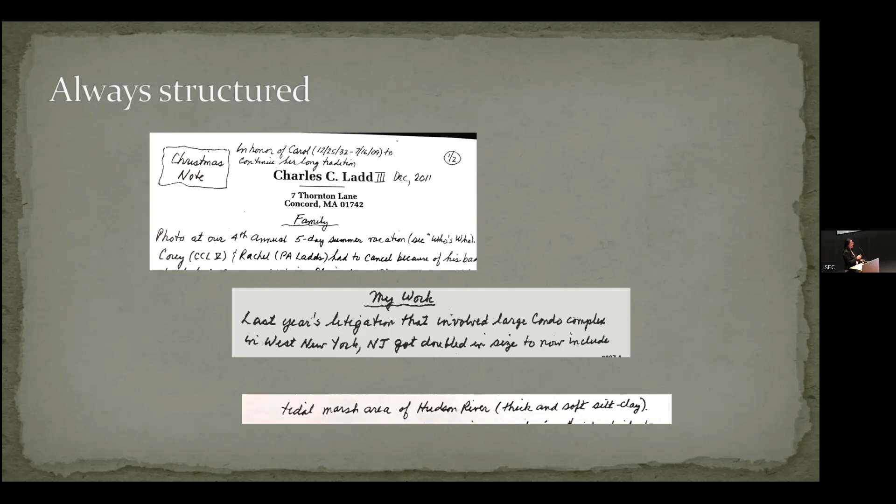Okay, this was a bit of what Chuck was about. But the reason I actually pulled out this Christmas letter from 2011 is because it was accompanied, as was normal, by a family picture on some nice vacation he and his wonderful, very big family had gone to. And the pictures typically came with a legend, with really carefully chosen symbols.

And then, of course, at the top, always CCL and the date. You would never want to forget that when you give him something, right? Initials and date.

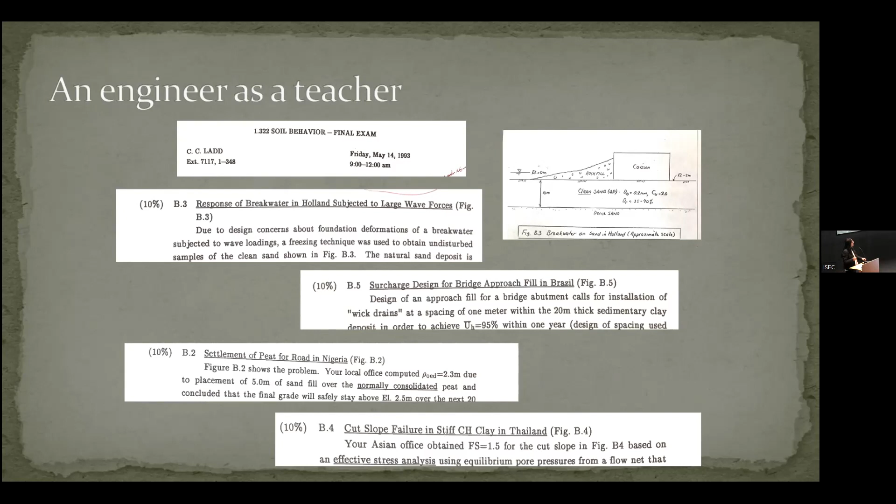But you see, these were just, I grabbed a few questions, you know, response of a breakwater in Holland, surcharge design for bridge abutment fills in Brazil, settlement of peat for road in Nigeria, cut slope failure in stiff CH clay in Thailand. This is how he fed his profession into the classroom.

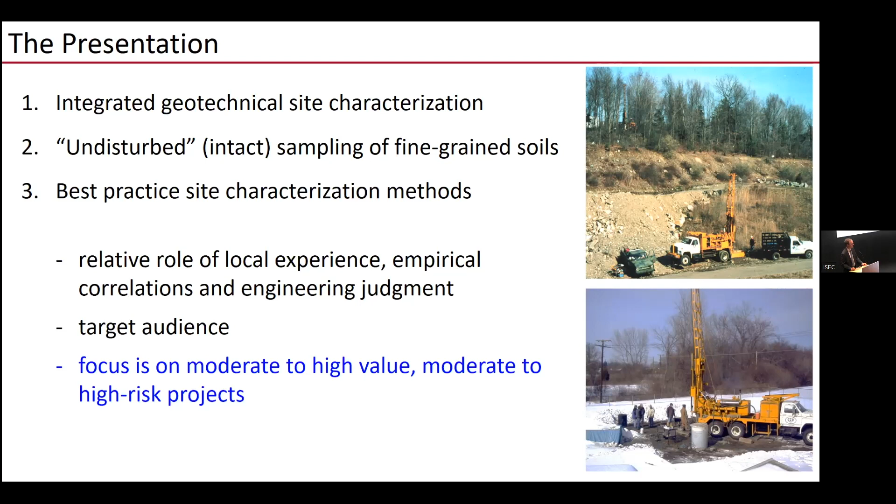So what is integrated site characterization? It goes beyond site investigation. It really is a methodology where you try to use a framework to guide you through all of the steps to make the actual site investigation part most efficient.

My friend and colleague, Jason DeJong, has a paper published in 2016 that has a framework and a roadmap describing in detail what integrated site characterization is. A key component to that roadmap is to develop a priori a geologic model of your anticipated site conditions.

And certainly on larger value or higher risk projects, you're going to need to bring in a team of geo experts. I will show you a case study where that needed to be done. And ideally, it's an iterative process.

Now, again, clearly on smaller projects, we're going to build a new Tim Horton Donuts on Route 1 in Saugus. We're going there one day. We only have that amount of time for drilling and sampling. We're not going to apply a lot of the things I'm going to talk about here. We know it's going to work in that case.

Now, in the offshore world, where I do a lot of my work, there are two products that come out of an integrated site characterization. One is the ground model. The ground model is a database of all information collected from the project, both qualitative, usually geologic-based information, and quantitative, things that we like to measure, in situ testing, laboratory testing, and so forth.

And ideally, at least in more recent times, this is all being integrated into a GIS type of framework where you can start to use visualization tools and allow everyone involved in the project to get access to that data. Once the ground model has been established, we then move on to create the design basis.

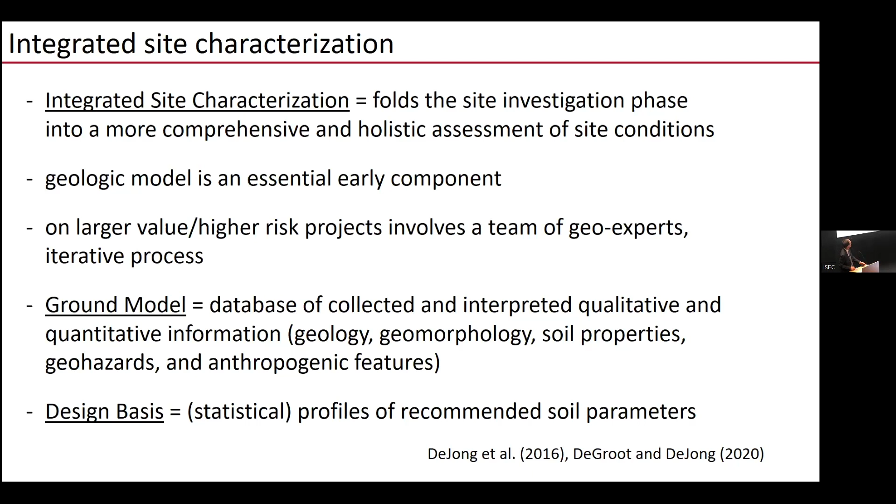And again, it all starts with geology. I have two quotes here from two of the early textbooks of geotechnical engineering. Professor Taylor at MIT, in his book, talks about the importance of geologic features. And then the rival from Harvard, Terzaghi, produced his book in the same year, not coincidentally. There's a couple of key statements in there that are very telling.

Number one is the first step. The first thing you should do is don't call a driller, don't book the driller, but study, do your due diligence in terms of the desk study.

Again, in the greater Boston area, we know it quite well, but I'm talking about sites you either don't have experience with or new regions you're working on. What's important is that this is written in the future tense: work with the geology, understand it as best you can before you lay out your site exploration. The idea is that when you go to the site, it evolves into a process of confirmation rather than new discovery, confirming what you suspect should be there in developing your site characterization.

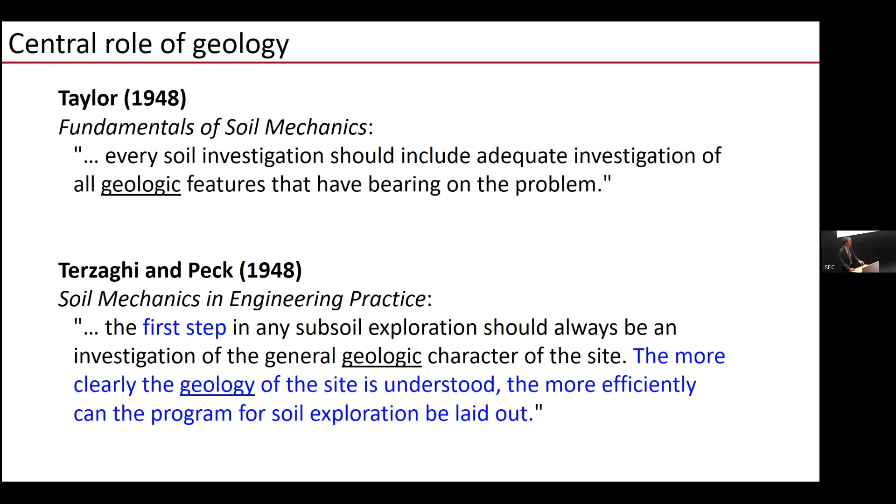Geology is really interesting in the New England area since we've been glaciated. This slide from Janet Stone of USGS in Connecticut shows the extent of the glacial maximum period about 25,000 years ago. The glaciers ended here, creating Long Island, Block Island, Martha's Vineyard, and Nantucket — that was basically the terminal moraine. The fact that our region has been glaciated created a significant influence on the type of soils deposited here.

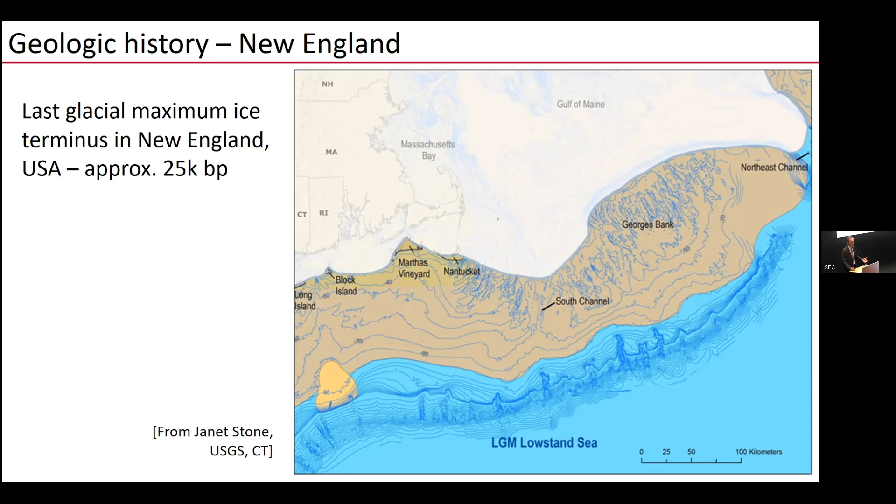Soils vary significantly across the state, and likewise in other glaciated regions of the world. On this map, here in our area we have marine clay, the Boston blue clay. We have marine clays deposited going up the coast with increasing sensitivity as we go north. Inland, near UMass Amherst, we have Glacial Lake Hitchcock, a long lacustrine lake environment where our varve clays were deposited — completely different material than Boston blue clay. And up at Lake Champlain, a marine environment, we have deposition of the very sensitive Leda clays. These can all be explained through the great work geologists have done mapping the state, creating maps we can use so that when we do a site investigation, we can go to this geologic information first to better understand our exploration.

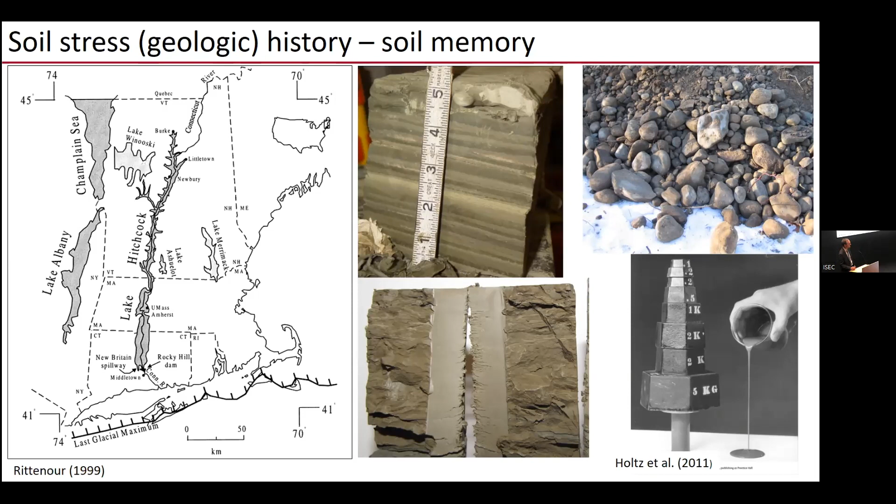But there can be subtle changes in soil characteristics over very small spatial distances. This is a picture of UMass Amherst. When the glaciers were retreating north toward Quebec, the water was about 77 meters deep on top of present-day Amherst. Sediments were coming in and created the varve clays — coarser material settled out in summer, and when the lake froze in winter we got finer grained clay, forming a varve. We have 1,400 varves on our campus, over a 100-foot deposit, so 1,400 years of deposition.

We have on our campus what is supposedly the tallest library in the world. I don't know why you'd want that, but we have it — 26 floors, reinforced concrete, pretty significant dead loads. You fill it up with books, which is what they did when it opened, and that's a lot of load. Yet this building is on a very simple mat foundation, because the campus is basically a drumlin with some sand and gravel on top of glacial till, on top of bedrock. Pretty easy foundation design.

You go 400 yards to the west, and right here is the edge of Glacial Lake Hitchcock, where the varve clays were deposited. The lake bed dipped very steeply into the bowl that was essentially the Connecticut River Valley. Right here is our sports arena, our hockey rink, an equivalent two-story building, open structure. The loads are nothing other than when you have 10,000 people in there, but that's still nothing compared to a 26-story library. Yet this is on a deep foundation, a Haley and Aldrich project — on PIFs, or Franki piles as we used to call them, because it's in the soft varve clay.

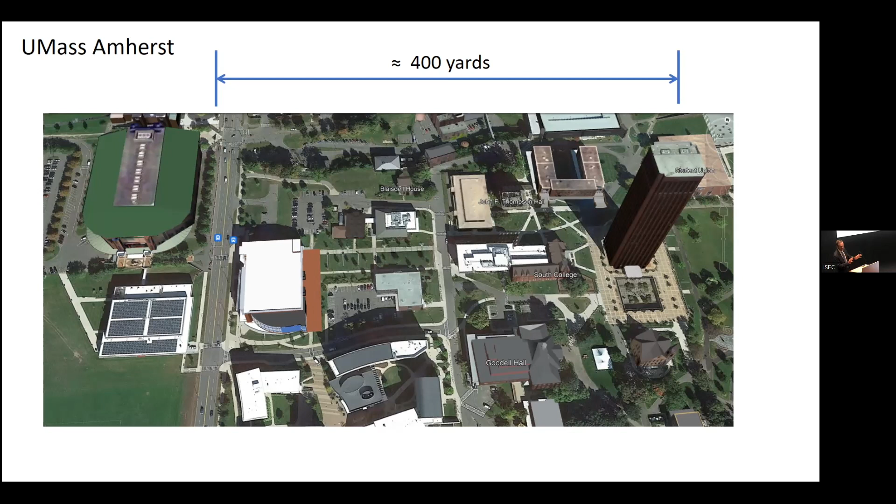So that brings me to what Professor Ladd always said: stress history, or geologic history, as I like to call it. Professor Ladd had great intuition in selecting one of the more famous acronyms in geotechnical engineering, SHANSEP. How many of us have actually written out what SHANSEP stands for? Probably never. Stress history and normalized soil engineering parameters. It incorporates the two most important aspects of fine-grained soil behavior: the influence of stress history on that behavior, and the fact that you can normalize data.

And I'm not talking about whether SHANSEP is applicable or not, but just the concept of normalizing data is so valuable to understanding whether things like your undrained shear strength make any sense for the stress history that your soil has.

If we look at stress history, there are a number of pre-consolidation mechanisms that can cause a soil to be altered from its original depositional environment, and I'll list those in the next slide. But I will say you will rarely encounter a truly normally consolidated soil. I've had cases where people have said, oh my God, we have an under-consolidated soil, which makes no sense at all, because they collected lousy samples and got pre-consolidation stress below the in situ vertical effective stress. It was just poor quality work.

Now, we are geotechnical engineers. At least I personally often struggle working with geologists because they're very qualitative. They use a lot of words that I don't often understand. We like to quantify things. So for us, we take that geologic history and we quantify it. For sands, we use relative density. For clays, we use pre-consolidation stress or the vertical yield stress.

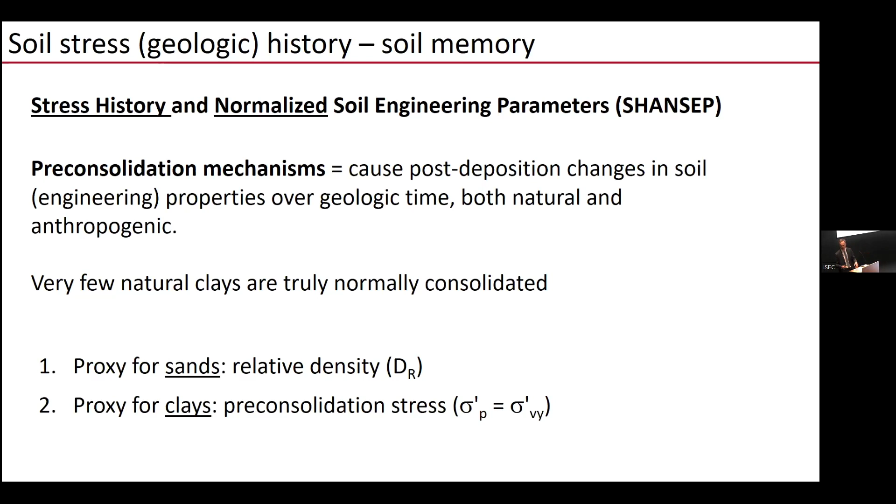Desiccation - we struggle a lot in New England with desiccation. In other parts of the world, we have a fairly high water table, but it does fluctuate up and down. And we did have ground freezing before vegetation came back after the glaciers. And then we have drained creep, aging, and physiochemical phenomena.

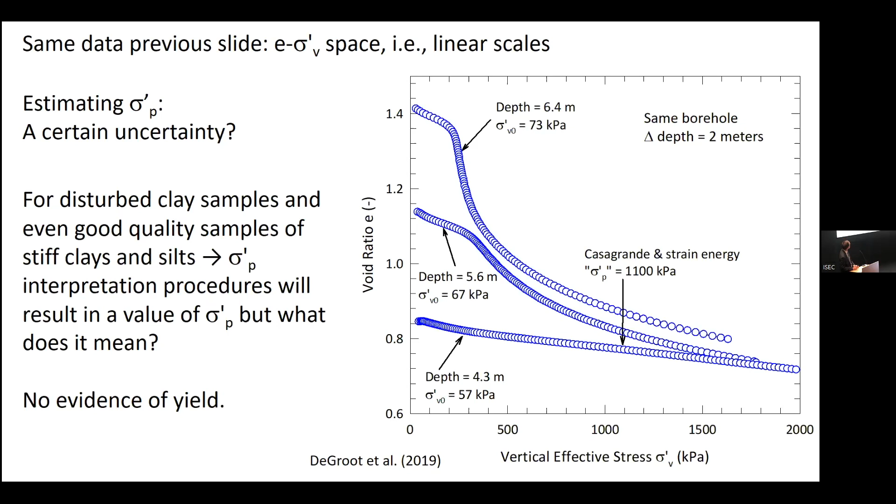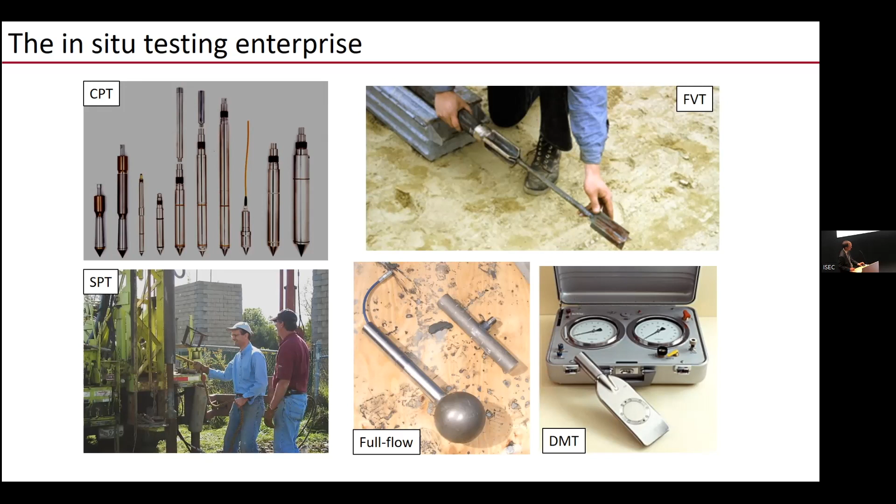On the other hand, once we have a sample in the lab, we have controlled boundary conditions. We can control stresses, drainage, strain rate, and measure what we want. A triaxial test gives us Mohr's circle, we can measure the undrained shear strength, and a CRS test gives us the vertical yield stress. But none of that data is particularly useful unless we have good quality samples.

So we have this challenge of balancing the best of both worlds. When I get to the third part of the talk, I'll give at least some of our recommendations on what we consider to be best practice methods.

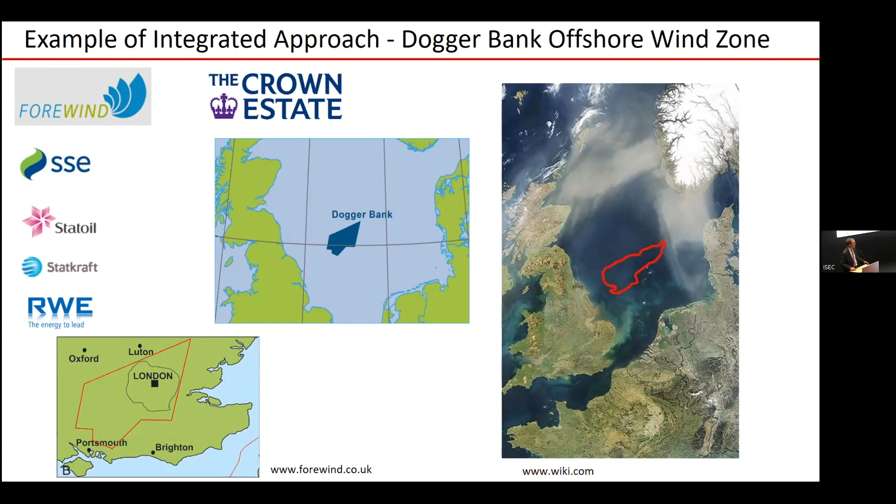A consortium of energy companies was put together. Statoil, now called Equinor, and the Crown Estate were leading all of this effort, and it was called Forewind. Early on in the project — a big project at a big spatial scale — they decided to do an integrated study. The first thing you look to is the geology.

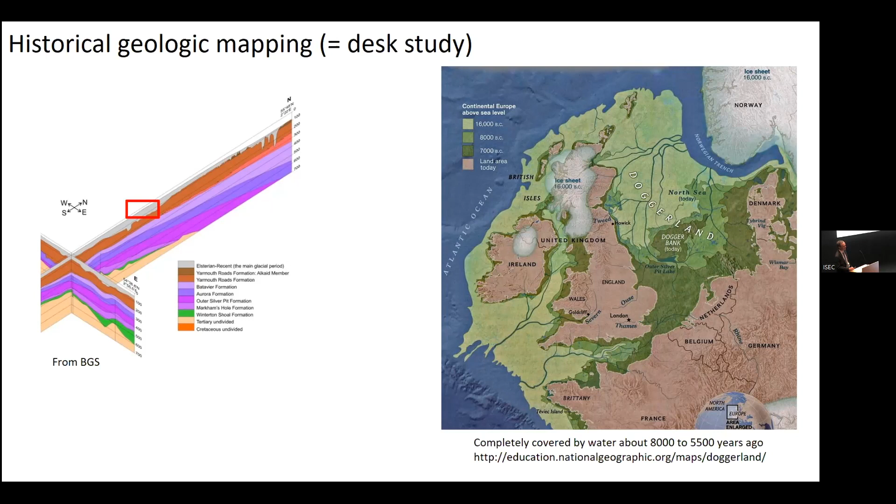And sure enough, some of the early data started to come in and said, wow, there's a lot of heterogeneity in this project. And so the geo team leader, Tor Inge Yetginer-Tjelta of Equinor Statoil, in my estimation one of the best offshore geotechnical engineers in the world, period, he was the team leader, and he quickly recognized that he needed to put a comprehensive team together to really do a proper job of characterizing his site.

I mean, there are billions of dollars on the line here. So he literally brought in from different companies experts in site investigation, lab testing, in situ testing, geophysical, geostatisticians, and so forth, and essentially had quarterly meetings where he locked the team in a room and said, you're not coming out until you make sense of this latest round of data that has come in.

Now, obviously, there was a great opportunity to do iterative work. So the site investigation program happened over multiple years. And the slide I'm showing here is what led up to what's called the consent phase. The consent phase is simply you need to prepare a package to convince the federal government or the UK government that you have the capability to continue working and eventually develop this wind farm. So the SI work did not stop here.

But look at the data that was collected, 60,000 line kilometers of geophysical data. I mean, this was terabytes of data. And thank God we had geophysicists on the project, because every time I look at one of those things, I have no idea what I'm looking at. I mean, I see lines going this way and that way, and they're very valuable, but they don't give us numbers. We want numbers. But look at the geotech part.

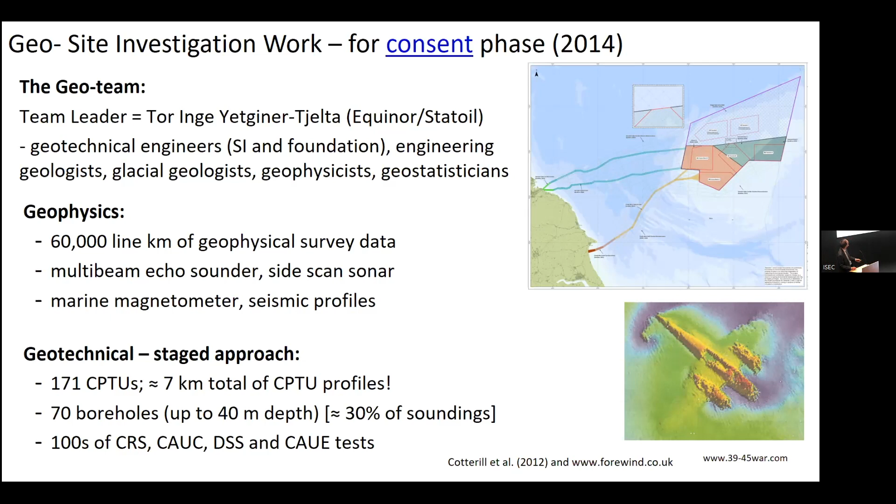And what was a really interesting experience is that while we were working on the project, again, there's our geologic map, we found the glacial geologists started using our CPT data to start figuring out the geologic history. And I remember Tom Lunne and I looking at each other and saying, wait a second, it's supposed to be the other way around. They're supposed to give us the geologic history to help us make sense of our data. But again, because it was an integrated team, it came together very nicely.

And geoscientists are great at making cartoons, and this was the updated cartoon map that now replaces this one here. I mean, you had everything here: the glaciers colliding. Some of the glaciers had a so-called wet interface that smoothly rode over the till. Some had a dry interface that caused glacial thrusting and faulting in the soil.

This you can see in the geophysical mapping. We had channels, sometimes filled with soft clay, sometimes filled with North Sea sand, which was the easiest part to characterize, just ordinary quartz sand from the North Sea.

But the most significant thing was that we eventually were able to get the geologists to confirm that this place was aerially exposed for many tens of thousands of years. And that causes desiccation, deep freezing, and lowering of the water table. And as those of you who have worked with desiccated soils know, they are very, very difficult to characterize. The data is usually all over the place.

And when the early lab data started coming in, I started looking at the CRS data. It made no sense whatsoever. The word desiccation had not yet come up, and I look at it and I'm thinking, wow, this looks like a desiccated soil. And that became a central focus of going forward, trying to help us make sense of the data to eventually come up with a design basis.

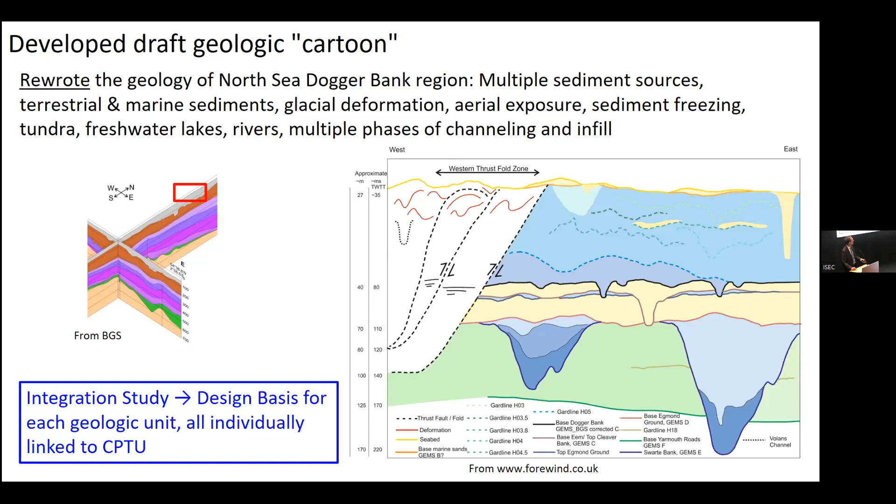Closer to home, as some of you know, we have an exponentially growing offshore wind industry in the Northeast. Good luck finding a drilling vessel over the next few years, and good luck finding a lab that does good quality testing and has the capacity to take on this work. The rest of the world is not stopping, and yet we're coming on board, and this is a lot of work. These things are spatially enormous, the landmass involved.

Now, one of the interesting things we have here is the previous slide I showed, the glacial maximum. These hatched areas are some of the lease areas that have already been awarded. And frankly, I would not have bid on a lease area that sits right here, because that's where the terminal moraine is, and it's loaded with cobbles and boulders.

So you can imagine the challenges presented with installing the foundations, but also the cable routes going to shore. There's a very high probability that any of these leases beyond this glacial maximum do not have these cobbles and boulders, which some of them can be the size of a house, I've been told. And so far, the data coming in from some of these sites is proving that to be the case.

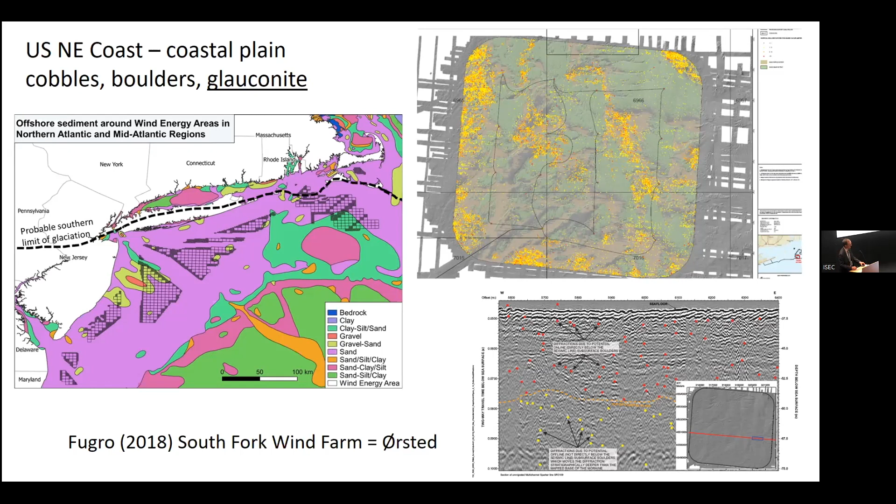And then finally, this is the latest round of leases let by BOEM. This was about a month ago, $4.4 billion for six leases. This is just to have the opportunity to consider developing the site. Just here's your money, take it, and you don't get it back. Now, unfortunately, this money goes into the black hole of Washington. None of it is earmarked to feed back into the industry, but the amount of money here is just incredible.

And they will be spending untold amounts of money doing site characterization work for these. There are many more in the pipeline. Coastal California is getting in the picture, and so is South Carolina, Florida, and Texas. There is a ton of work coming forward in this industry, and I think it's very exciting, especially for the younger generation here in the audience.

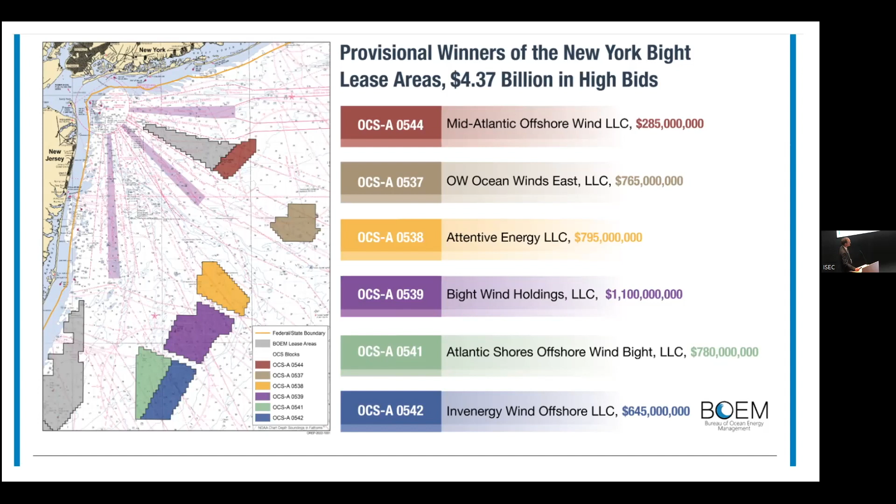Okay, so that's the end of part one. Now I want to do a deep dive into Professor Ladd's first love, which is sampling and sample disturbance.

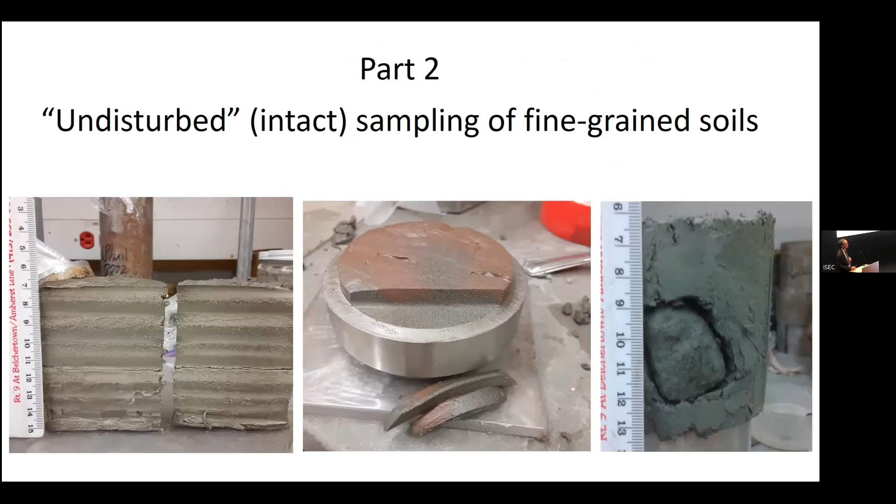And we're going to start by looking at a stress path. I know this may cause a little bit of PTSD for some of you, but we have to use stress paths because they are so valuable. The question asked is, we have a low OCR clay. We know K-naught is less than 1, so it's sitting here in PQ space at 0.1.

If we load it in a vertical direction, we know we develop positive shear-induced pore pressures, and we get some undrained shear strength. We collect a sample, bring it back to the lab, and find out that the effective stress in the sample is over here. How do we know that? We can actually measure the suction, because the pore pressure goes negative when we have a suction.

In the old days, you would do this in a Triaxial cell with a null indicator. And if you know what a null indicator is, you should be retired by now. But we have more modern—sorry, Jack, you don't need to retire. You look so young anyway, so you're good. You're good for another 20 years.

But we also have suction probes that can actually measure the negative pore water pressure in the soil. This was one of Professor Ladd's first pieces of research work. It was his first major paper in the 1960s with Lambe, on the effective stress after sampling. If you do a really good state-of-the-art job of collecting a soil sample, you will still lose about 70% of the vertical effective stress in the sample. And if you do a lousy job, you'll be down to almost 100% loss.

So we have this sample sitting here. It's at an isotropic state of stress, which has nothing to do with in situ. It now has a huge OCR, which has nothing to do with in situ. We don't actually know what the effective stress is, but let's do a UU test anyway, because it's inexpensive, quick, and we'll get a number.

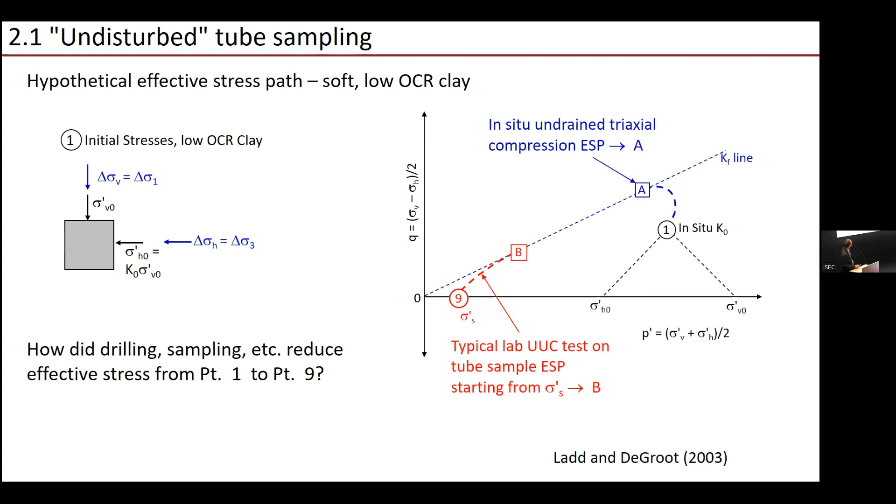But let's ask the question, how did we get here? The first step is we have to drill a borehole, and we cannot avoid that. There's going to be stress relief. The interesting thing is that when we drill a borehole, it's like a Triaxial extension test. So even if we have a drilling mud, we're going to get a reduction in the vertical stress. We start to migrate over toward Triaxial extension.

We cross the P axis, which Professor Ladd called the perfect sampling point, just as a frame of reference for his work. And then if you keep going, and if you do a lousy job and don't use a drilling mud, you could actually fail the soil you want to sample in extension unloading before you actually collect the sample. So the first job is to stay as far away from this failure envelope as possible. We cannot avoid this process up to point 2, but we don't want to go to point D here, where we've actually created failure before we even run the test.

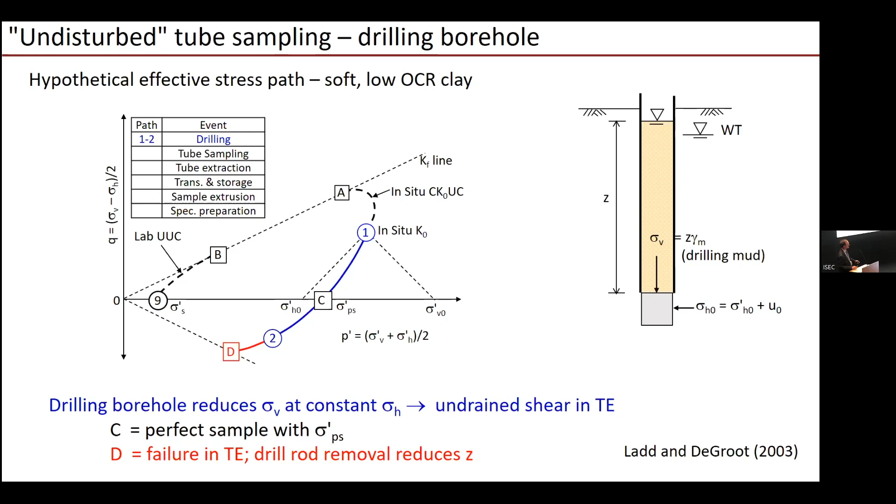The next step, which Professor Baligh worked on, and CT Chin, who's listening in, did his work on, is: what happens when you push a tube into the soil? In Professor Baligh's work, which is the strain path method, he found that as the tube is coming along, the soil goes through a compression cycle, reverses to an extension cycle, and then more or less returns back to where it started. So it's one cyclic loop back and forth.

In his research, he found that the geometries of samplers, thicker samplers and so forth, induced larger strains. Looking at our stress path: we go through a compression path, then our stress path migrates a little to the left because now we're over consolidated. Go to extension, go to compression - we continuously migrate to the left because these are all shearing actions, and low OCR clays develop positive shear-induced pore pressures. So we're losing effective stress continuously.

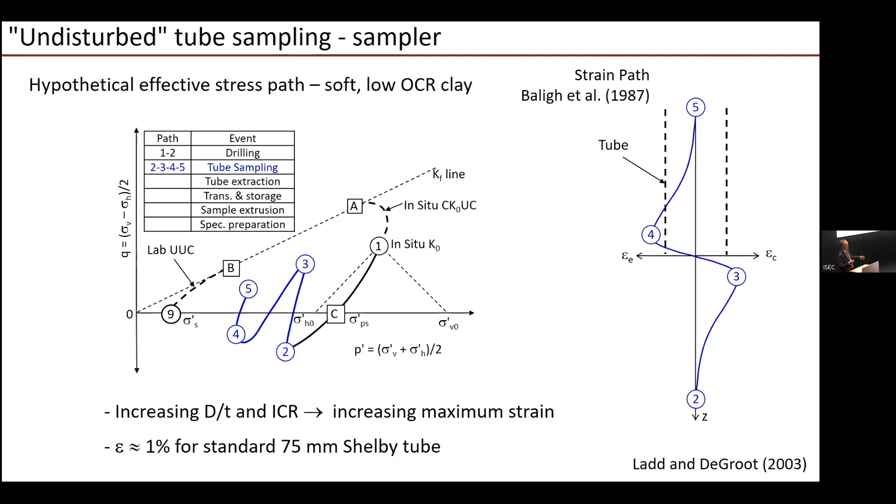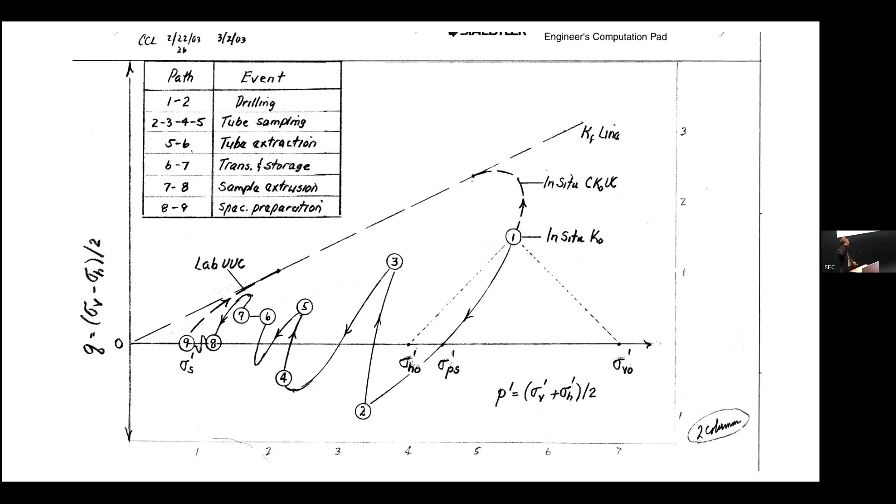So finishing the stress path - back to Professor Ladd. Of course he did all this by hand when we were working on the Casagrande paper. He has his name, the dates, everything here, and there's the full stress path. He needed someone to take his hand drawings and put them into a computer drawing, so that was me, with respect to my drafting background. Now we have this figure, and we were at point 5.

The question is, what's the consequence of this? So what people have worked on, a number of organizations and ourselves included, is research where you try different methods and different sampling techniques. One thing I learned early in my career is that it's always good to do something you know is going to be lousy. At first I thought, why do something lousy? But then I realized that's a nice data point on the other extreme to show your good data by contrast.

So we did some work in Newbury, Mass, where we did an SPT sample in a hollow stem auger hole with no mud. We did a hollow stem auger hole with a standard Shelby tube with a free piston, not locked, just a free piston. Then we did mud rotary, which of course is best practice, using a somewhat modified Shelby tube - I'll show you that later. And then we did what's considered the state of the art, which is the Sherbrooke block sampler. This has been proven to collect the best quality samples, so that's our frame of reference.

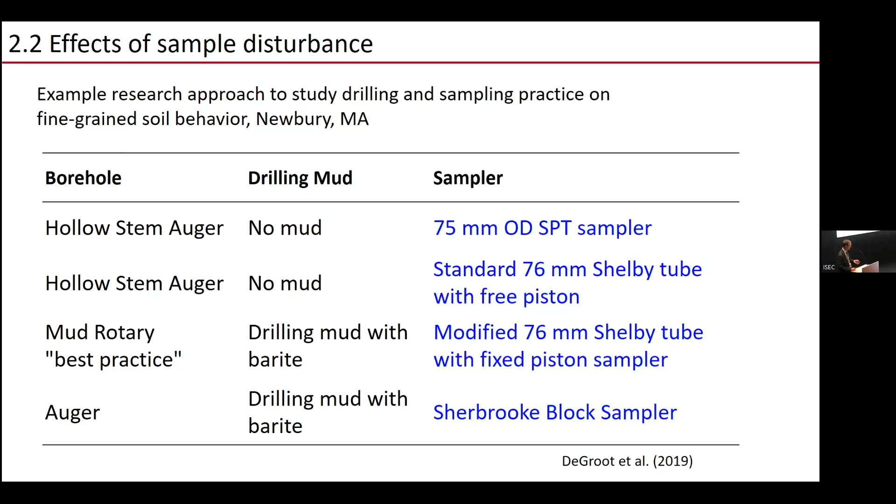If you don't know what a Sherbrooke block sampler looks like, this is our block sampler here. It has 3 tubes that inject water, the blades are open, and you can use it with a regular drill rig - this is just a CME 55 rig. You rotate, slowly carve an annulus, then activate the under-blades to provide basal support, and pull the block out of the ground. There's your block sample - you seal it up and it's ready to bring to the lab, to be used as your reference behavior.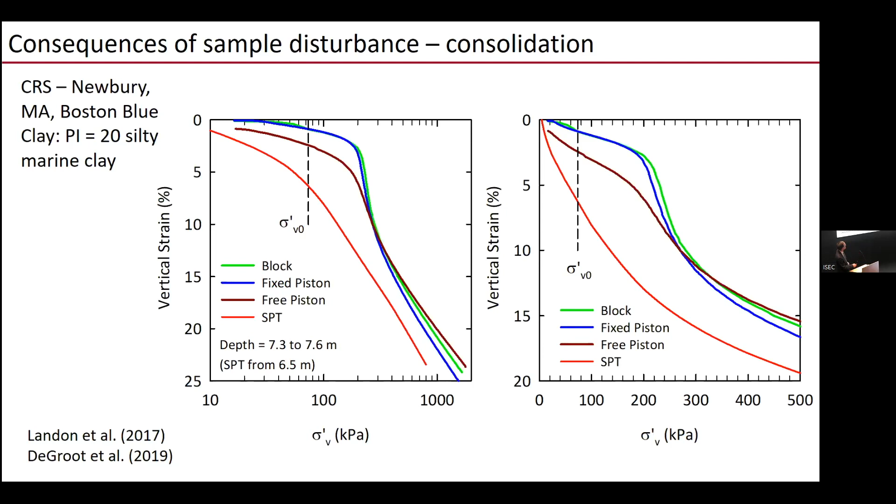In terms of undrained shear strength, it can be a little bit trickier, because with undrained shear strength, especially when we run consolidated tests, we are now reconsolidating the sample. So if we have a pretty lousy sample, we might get a lot of consolidation strains, and that's going to change things. So you have destructurization—they're kind of working against each other.

But these are samples we collected at the Onsøy test site in Norway. They have a thick walled 54 millimeter sampler—that was our lousy sampler—a pretty good fixed piston, and a Sherbrooke block sampler. You can see the stress strain curves, and you can see the stress paths here.

I think it's fair to say for some projects, people might say, well, so what? There's not a big difference. Well, I can tell you for projects Professor Ladd worked on, this is a pretty important difference in terms of whether you need to stage construction or not.

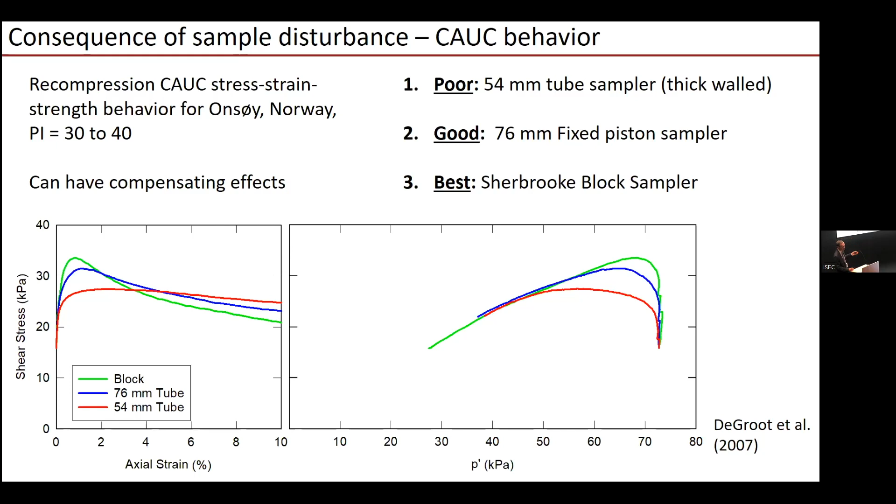And it actually brings me to a little segue about this word conservative. I think, at least as academics, we do a poor job of giving students the impression of what conservative means. I think they think it means low—go low and you'll be good.

Well, there are a lot of design applications, especially in the offshore world—suction buckets for anchoring offshore oil and gas platforms, and now floating offshore wind turbines are using suction buckets. You need to get the undrained shear strength profile very tight because you've got to be able to install the suction bucket, but then you have to have it perform under service loading.

And now also with monopiles. This is an old picture now, and these monopiles are up to 10 meters in diameter now. You've got to make sure that the contractor knows exactly what kind of equipment they need to mobilize to get that in the ground. And then you need to make sure it has enough capacity.

So you can't go low on one end and high on the other end and say, well, it's conservative, I'm going to be good. And again, in the offshore world, if you mobilize the wrong vessel, that's a lot of money—hundreds of thousands of dollars a day. So my rant here is: let's just be a little bit careful about what the word conservative means.

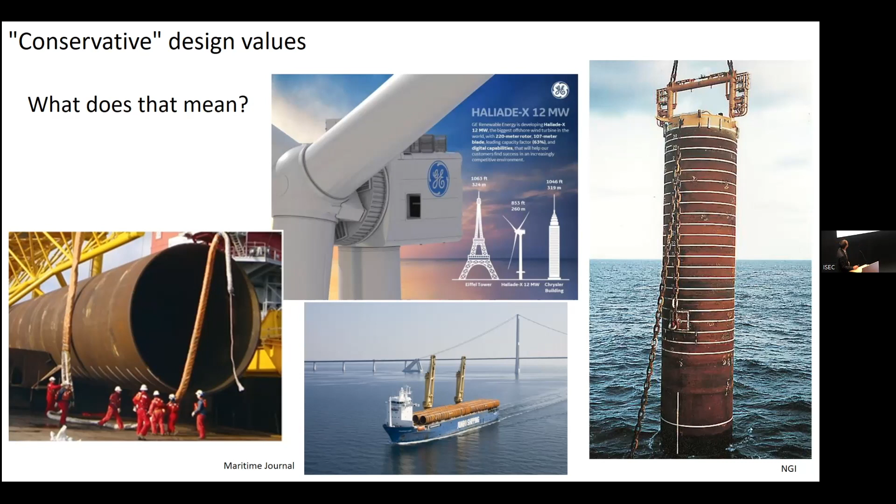Well, Professor Ladd worked a lot on clays. What about what we call intermediate soils, which are this dirty subject we don't talk about in undergraduate soil mechanics. We go clay, we go sand, and we skip everything in between other than classification. They are complicated.

These are triaxial compression tests run on a young PI equal to 4 silt. Young means we reconstitute in the laboratory. OCR 1.8. The black one is the specimen consolidated, sheared, undrained, and we get contractive behavior. Loops over to the failure envelope here.

We then applied a Baligh strain cycle to the blue sample—plus or minus 0.5% strain cycle. These are 70 millimeter specimens, so 0.5% is less than half a millimeter displacement. Consolidated back to the same effective stress state, and we get completely different stress strain behavior: a little bit of contractive behavior, and then it switches to dilative and starts to ride up the failure envelope.

Then when we apply a plus or minus 3% strain cycle, we get something totally different. It loops up and rides along the failure envelope.

The key point here is that when you collect a sample of these soils, you don't know what the disposition of your sample is. You don't know how loose or dense it is in the ground unless you have really good in situ data. You just have a sample, and you measure this behavior versus this behavior. That's obviously a significant consequence, except for drained problems—it doesn't affect the friction angle. So phi prime is the same for everything. I guess that's a good outcome.

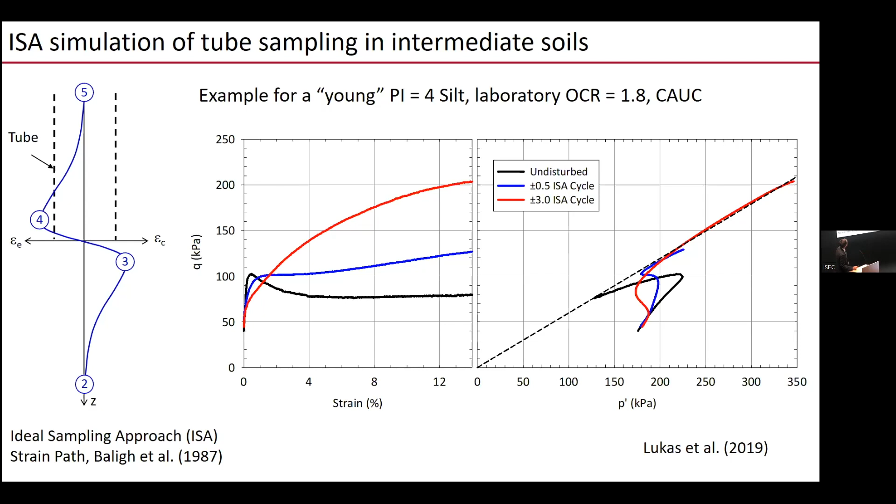We also went to the Halden silt site in Norway, and we used the NGI 54 millimeter sampler, a gel push sampler, and again the Sherbrooke block sampler. And this is a silt.

Here's another one of the crazy things about our profession. It's 89% silt. The Casagrande PI is 2. If you do the fall cone PI, you get 8. Some of you know there are differences in the way we measure the liquid limit around the world, which is kind of like nuts, but that's what it is. But I can tell you, whenever you have a soil with less than about 5 to 10% clay, PI less than 2, you can't trim it. It's going to liquefy on you. This is about the border.

We were barely able to collect and trim these samples. And now there's our Sherbrooke block sample, dilative behavior. There's the gel push sampler, and there's the 54 millimeter sampler, completely different stress strain characteristics. Now they all follow the same failure envelope, so that's good for drained analysis, but for undrained, depending on what strain levels you need to concern yourself with, there's a significant difference in the behavioral response you're obtaining here.

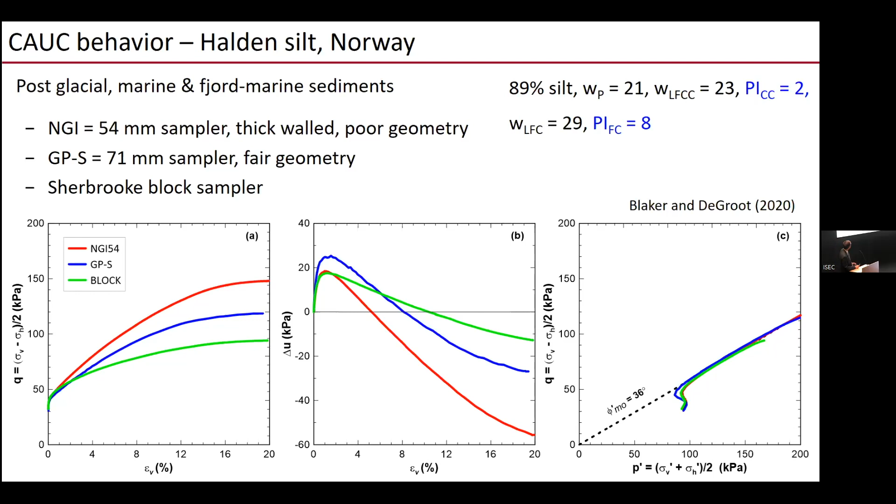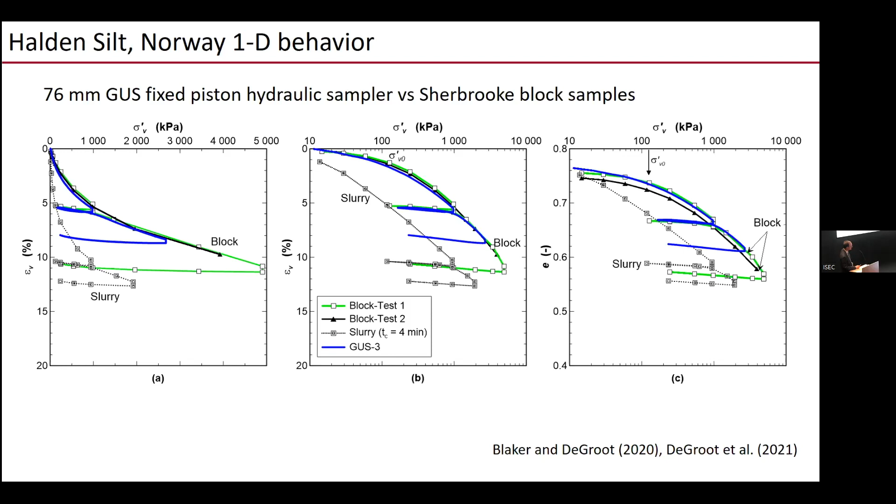And finally, one last example for stiff high OCR clays. The really interesting thing about this is that the sampling effective stress is now a completely different picture than soft clay. Soft clays were always great, it's always going lower and lower. Stiff clays, it can go the other way, because the shearing process, being a very stiff high OCR clay, is now developing negative shear induced pore pressures. You can have an effective stress in your sample sitting on the bench under zero total stress that is higher than it is in the ground.

And so we start to see things like this, where the UU test, which Professor Ladd really hammered against, and I will repeat that in a forthcoming slide, has a higher undrained shear strength than the so-called high quality CAU-C test. In fact, when you run CAU-C tests, you have to be very careful to watch for swelling during reconsolidation. That's a big challenge with these materials.

And even more interesting, we collected this data at an offshore site. We measured sensitivity with the UU test, and we got sensitivities less than 1, a lot of them less than 1. And you're thinking, that's not possible. Well, this is a site where the soil was desiccated. You can kind of guess which site it is. It has a lot of macro and micro features. And so the intact samples had these planes of weakness.

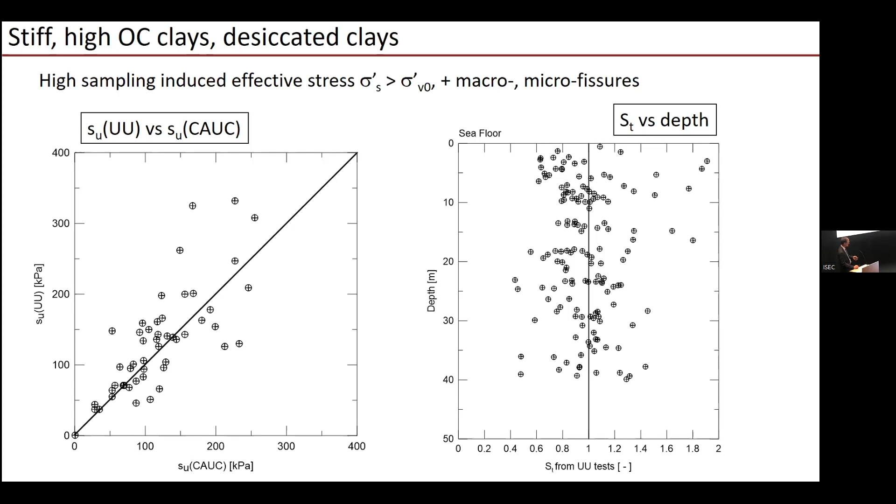But perhaps more significantly, this soil is really hard to remold. I mean, the soil in plastic bags, using hammers to try to remold it, a lot of additional shearing, effective stress keeps going up, and you can get the remolded sample having a higher undrained shear strength than the intact sample. This initially caused a lot of confusion, but we were able to figure it out and explain it through basic soil mechanics. So it's not always that you get a low value on disturbed samples, I guess is my point.

So how do we quantify sample quality? Well, we don't have a definitive method. We don't have something like you poke the sample and it says I'm good, and then you go run your test. But we have some very useful tools, and one of them is X-raying. I think Dr. Germaine produces the best X-rays in the world.

These are 4 examples, although I'll say in the offshore world, we now use CAT scans, spending more money on a CAT scan than I get on my body when I have to go to the hospital, on an offshore sample. Zach Westgate was just talking about a project we're working on, $10,000 to get CAT scans for a handful of samples, but that's the offshore world.

In any event, in these Shelby tubes, white is a void, clearly a disturbed sample. The rock is not necessarily a problem per se, it could have been a drop stone. Heavily disturbed sample, these are pretty obvious even to a good tech when they're extruded. This is more of a concern, these are more subtle signatures of disturbance, curvature at the edges, little cracks. And then you see a nice quality fixed piston sample of the varved clay, with lines all the way to the edge.

This is a great first step, but we are engineers. We like to quantify things. And so NGI, particularly Tom Lunne, spent a lot of time and effort developing a sample quality rating criteria that essentially says how much volumetric strain it takes to get that soil back to where it was in the ground. Clearly, the more strain, the worse things you did to it. They've iterated through the process over the years and come up with this final framework.

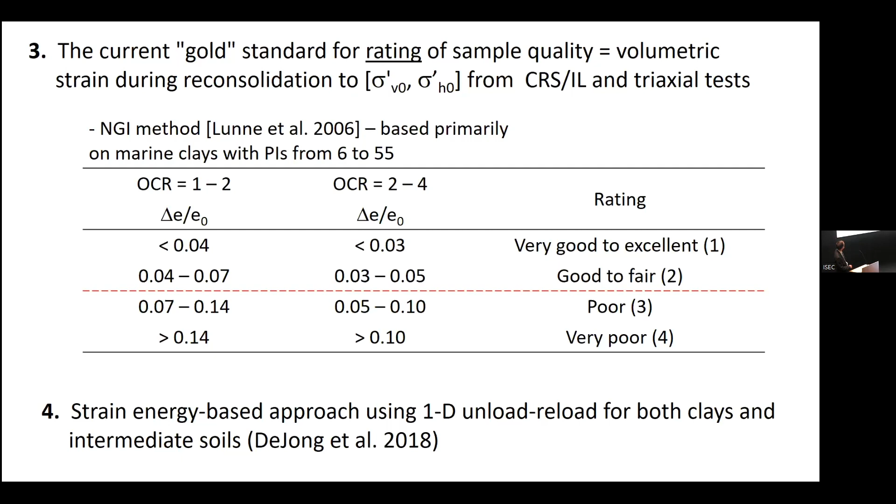People are applying this to silts, which are very stiff on 1D loading, and it's certainly not applicable. So to that end, Jason DeJong worked towards using a strain energy-based approach that uses the unload-reload loop, and it's applicable to both clays and intermediate soils. But the holy grail is to try and come up with something that is actually non-destructive.

In everything I've described to you so far, you have to run the test to find out what the quality of your sample was. So you get the information afterwards.

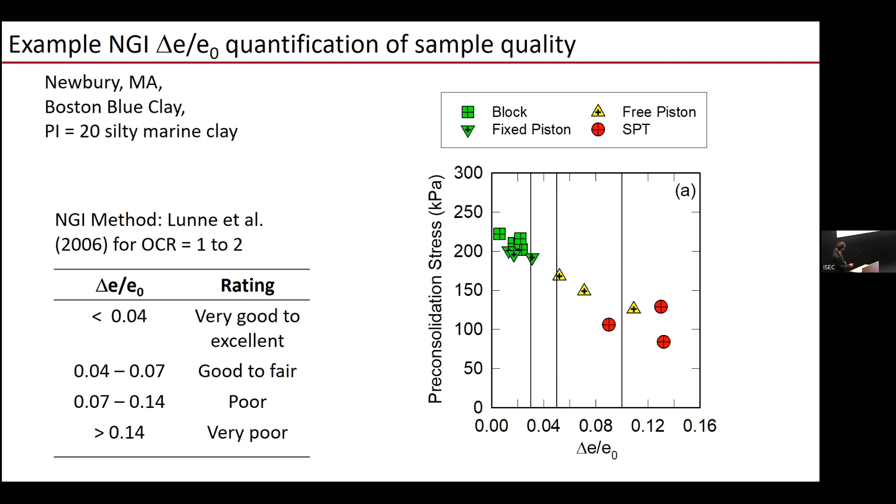By the way, here's an example, back to Newbury, Boston Blue Clay: pre-consolidation stress versus delta e over e-naught, for block samples, good quality fixed piston samples, poor quality piston or tube samples, and then the SPT samples. The trend is very distinct.

So David Hight came up with a non-destructive method for evaluating samples using shear wave velocity and sample suction. The idea behind this framework is that the soil has some inherent backbone curve in terms of shear wave velocity versus the product of the stress, and shear wave velocity depends on the stress product.

So if you can measure the in-situ shear wave velocity with a seismic piezocone, and if you can estimate the in-situ stress, we can always do sigma-v, and we need to find a K-naught to do sigma-h, you can develop a backbone curve for the soil.

And then when you come along and take your sample, at least for low OCR clays, we are always going to migrate to the left from the in-situ state, migrate down. And of course, our worst quality sample would be something where the shear wave is very low and the suction is very low.

A bunch of us working in soft clays, UC Dublin, NGI, ourselves, thought, let's try this out for soft clays. Another challenge is we've been trying to work on it with intermediate soils like silts, but there you have to somehow quantify the potential for the samples to have contracted or dilated during sampling. That's a whole other level of complexity.

But applying this method, you can build bender elements—these are just little piezo-ceramic elements. You can put them in simple platens. You can take a cut section of a Shelby tube and run a shear wave velocity across it, or Melissa Landon here is doing some of her PhD research on a block sample in Onsøy, again measuring shear wave velocity across there. It's not a particularly difficult test to run, but it's not the most friendly test to run in the field where things are messy and there are a lot of environmental conditions.

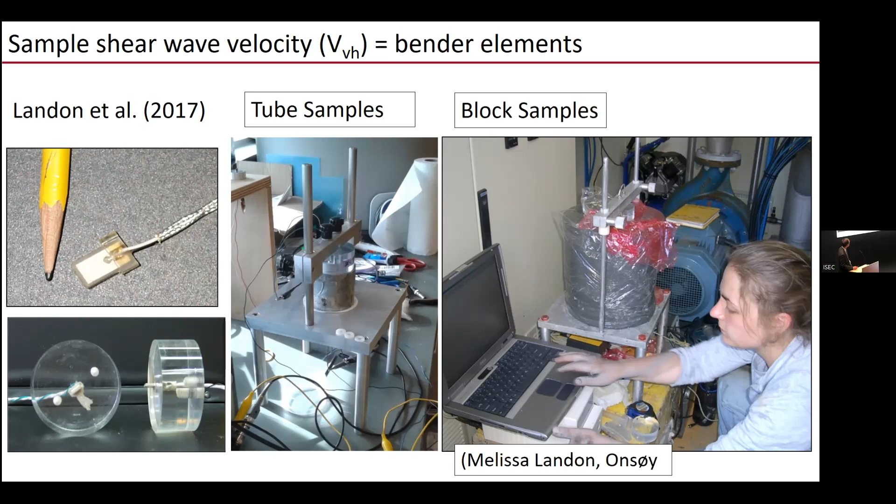On the suction side, Steve Poirier, who I think is in the audience somewhere—hey, Steve—developed, in parallel to Melissa, the suction probe. The suction probe is a more modern version of measuring the negative pore water pressure in the sample. The goal was to build something with off-the-shelf parts: a pressure transducer, a housing, a high air entry stone, and most critically, a copper seal the size of a wedding ring. And if Jack Germaine hadn't told me to use a copper seal, I don't know if Steve would have ever graduated.

Rubber O-rings do not hold suction. When we introduced this copper ring, we could get negative pore water pressures down to the megapascal range without cavitation. You've got to saturate it properly. And yet we didn't need to go anywhere near that. In the London clay, they need such high numbers because it's so stiff. We were more in the 100 kPa range.

But thanks so much, Jack. You really saved us on that one. Or you saved Steve, actually, and my guilt, I suppose.

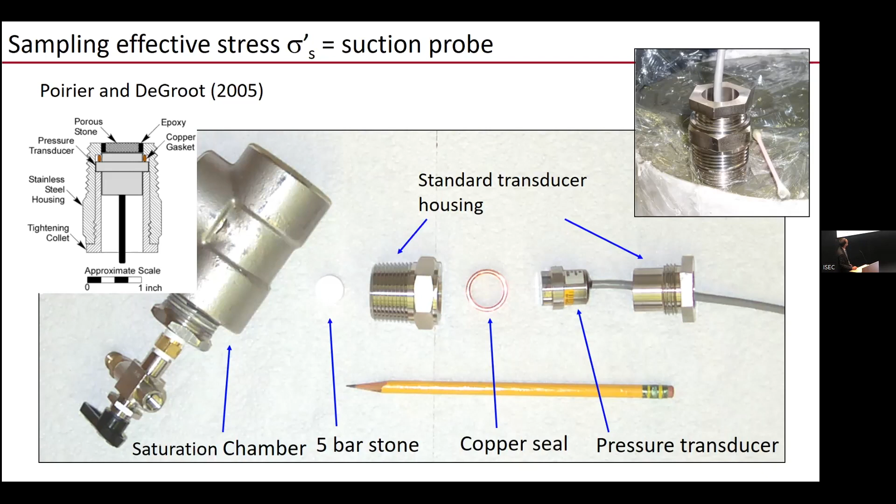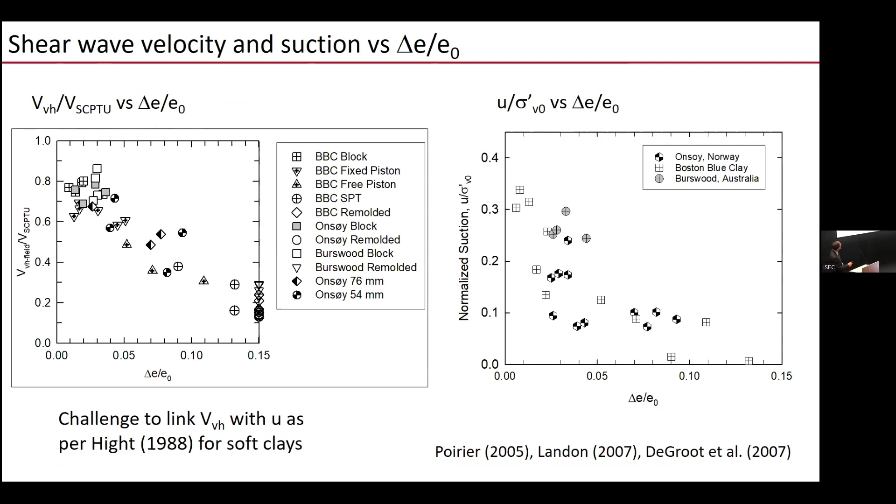So what did the data look like? Here is shear wave velocity measured actually in the field on our samples, normalized by runs from seismic piezocone tests, versus delta e over e-naught. It's a nice looking trend. It is 3 soils. That's not a lot, but it is 3 soils.

Suction is a bit more of a challenge to measure because the release of suction depends so much on the grain size characteristics of the soil. Not as much with shear wave velocity, it's much more dependent on the stress state. So we definitely see a trend here, but we also see some greater variability in the trend.

The big challenge we have is that when we try to put it in David Hight's framework, his framework works where you're measuring suctions in and around the effective stress because they're stiff soils. We're all the way over here at very low suctions, and so you have to do a significant extrapolation of the backbone curve. That's really tenuous. So this is still a work in progress, trying to couple these measurements with these measurements in order to come up with an a priori, non-destructive way of measuring sample disturbance.

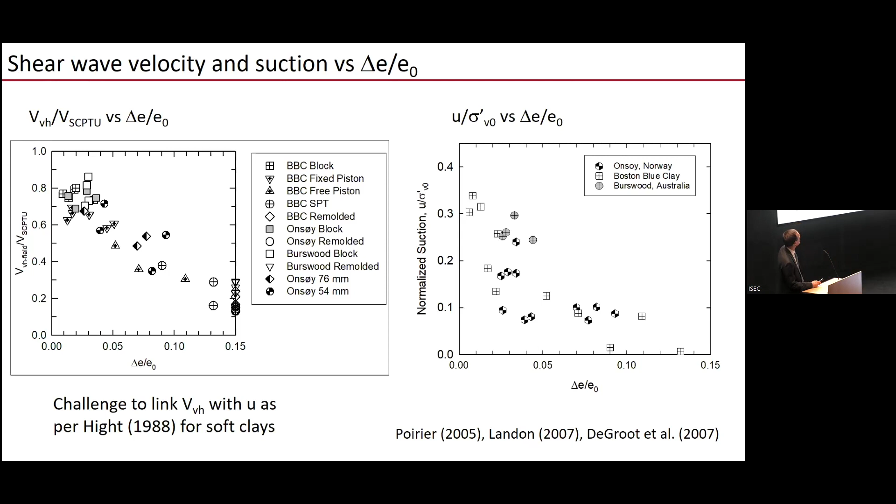Now, what do we do about remediation? There's two issues to consider. If we've had constrained swelling, which is basically redistribution of water content in a tube, that's not a big deal. We can reconsolidate in-situ stresses. But if we've had shear distortions that have destructured the physiochemical bonds, that's a big problem. You can't make them come back. That would be wishful thinking.

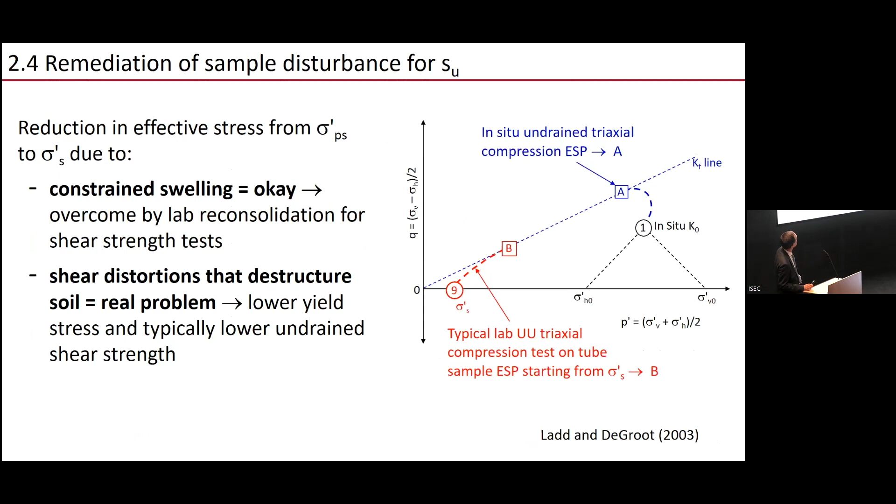So you have a few choices in terms of reconsolidation options. You could do nothing, which is very common and popular in practice. You just take the sample as is and run a shear test - a UU, a Torvane, a pocket pen, fall cone, lab vane - we've got a whole bunch of them.

Or you can do what NGI developed, which is let's bring the soil back to the in-situ stress state, because that's what we want to measure the behavior at. Now we know we've had some sample disturbance, so we're going to get a little bit of volumetric change. The idea was if we collected a pretty good sample, we balance them out.

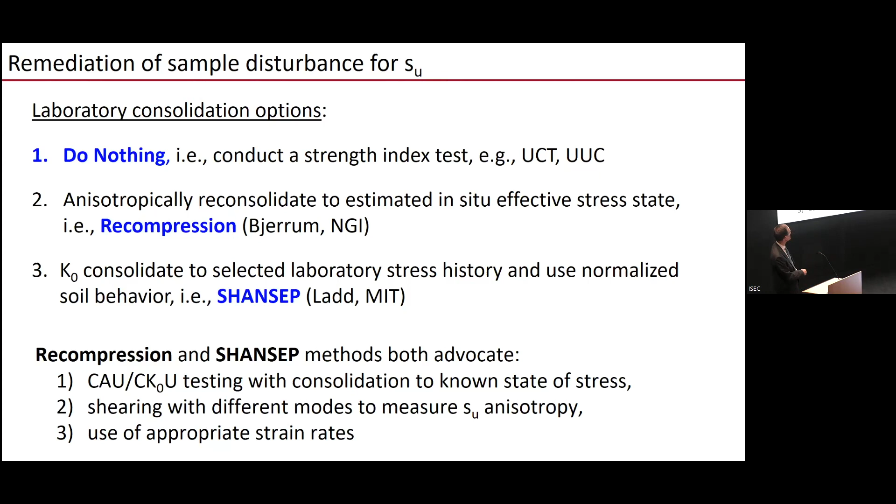Professor Ladd took a totally different approach insofar as he did not have confidence in the quality of a lot of samples that were collected. He relied on stress history and normalized soil engineering parameters and said, let's bring the soil to states that are well-defined, measure the soil and the normalized soil engineering parameters, and then apply your best judgment at determining the stress history of the site to get your design parameters. Otherwise, the methods are completely identical in terms of what they advocate with respect to the testing regime.

So back to the UU test. If you use the UU test for measuring, say, SU average for stability problems, as Dr. Germaine and Professor Ladd showed, it's like the three bears eating the oatmeal - one was a little too hot, one was a little too cold, and one was just right. It happens, you showed this in your case studies. The problem is you don't know where you are - you don't know which bear you are. That's the big challenge, unless you are really good at analyzing the data with respect to normalized parameters and so forth.

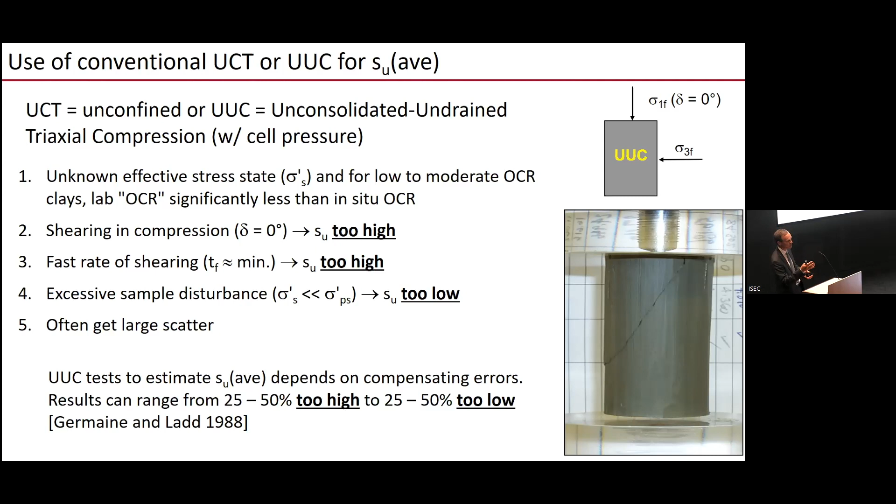And the reasons of concern are that, number one, we have an effective stress state that has nothing to do with in-situ, and we don't know what it is because we don't measure suction in routine practice. We're running triaxial compression, so SU is too high there for SU average. We're shearing fast, so SU is too high there. We have excessive sample disturbance, SU is too low. They're compensating errors, but you never know to what degree they're compensating. So it's a moving target, and as a result of that, you often get profiles that look like this.

If the thing goes backwards, there we go.

There's a project Professor Ladd worked on, a UU test, Torvane test. There's a project I worked on, a stiff offshore clay. These are UU tests. Good luck picking a design basis for both of these. You couldn't get a better plot with a shotgun in terms of the variability of data.

I want to emphasize, you can say, wow, I want to sleep at night, let's just do this. Well, you have a real problem with the pile drivability analysis. So it's not that simple, just going low.

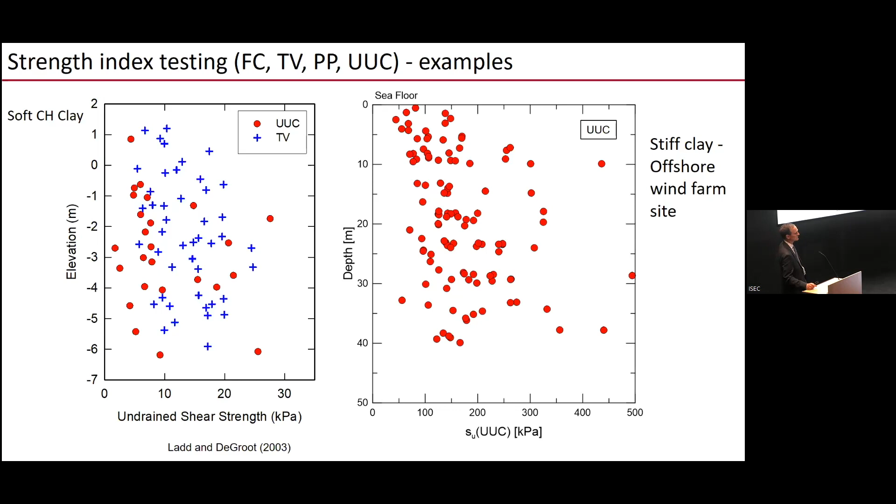Okay, now to the last part, a bullet list of practical best practice recommendations. I believe very strongly it all starts with companies having very detailed method statements. This is very common in the offshore industry, less common on land. I've seen some companies, like David Height's company, does a very good job of this. In the offshore world, Ørsted does a phenomenal job of this.

These documents detail exactly what you want, step by step, detail by detail for everything: drilling, sampling, in situ testing, lab data, reporting, all of that stuff. Because you need to clear up all of these potential misunderstandings that happen. A lot of times, in the unfortunate nature of our business, many companies no longer have in-house drilling or in-house lab.

So now you're going across companies, now you're the client. And yeah, there are good drillers, there are good labs, but the communication in terms of what you need done is so important. It's not enough just to reference an ASTM standard, which, by the way, I want to shout out Richard, Jack, and Amy for all the work you've done in ASTM over the years.

We owe the three of you a huge debt of gratitude. So I think companies need to develop these and find your in-house experts. If you don't have in-house experts, bring in some peer experts to help you develop these method statements. And they need to be constantly updated, since the standards are constantly evolving.

We're writing a new version of the Marine Soil Investigation Standard right now, and it's changed quite a bit from the previous one. It's all applicable to renewables and so forth. You need to be on top of this. I can't stress this point enough.

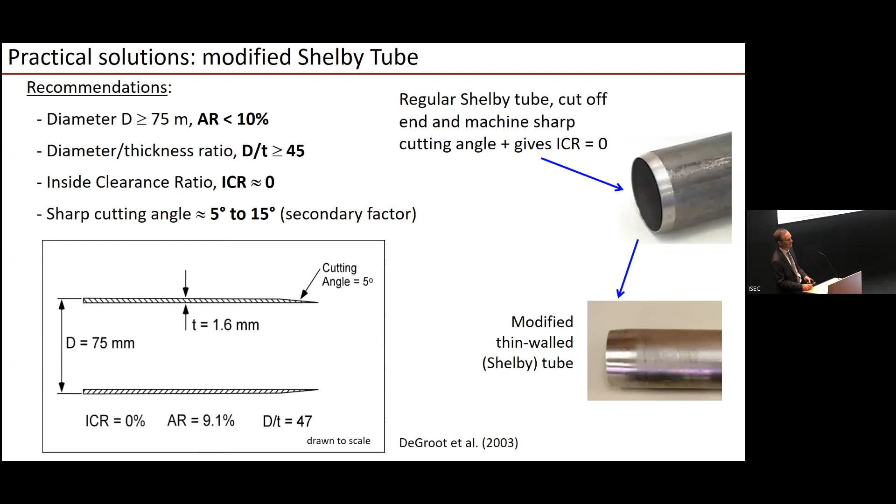I think the most important factor is to use a fixed piston sampler, which you and Ladd said way back when we were working in the Arctic. They didn't use a fixed piston sampler and got lousy samples. Jack went up there with a fixed piston sampler and got good quality samples. But you'd be surprised how many people are challenged to do this.

A fixed piston sampler can be rod actuated or hydraulically actuated. We have an Acker Gus sampler—that's this one over here. The rod actuated one is not easy to use.

I've worked with drill rigs in Europe that are specifically tooled to handle the double rods, but most of the rigs here are not, and it can be a real mess. So most drillers use the Gus sampler.

A couple of key things about the Gus sampler: the packers, which look exactly like this, need to be in good condition and properly hydrated. That's critical. So whenever I go sampling with the Gus sampler, I put them in a Shelby tube, put them in a bucket of water, and leave it there overnight.

I've had a number of calls from people saying, oh, we used the Gus sampler and it's a piece of crap that came up empty. It's because they didn't take care of the packers.

Can I say crap in Northeastern, Tom? Yeah, okay, thanks.

The other thing is there are several O-ring seals in the Gus sampler. When you're testing a silty material, that silt gets into the O-ring seals and you're going to run into trouble. So when we do Gus sampling, I just take the whole thing apart every time. It takes about 10 minutes, and I repack the rings and pack the packers.

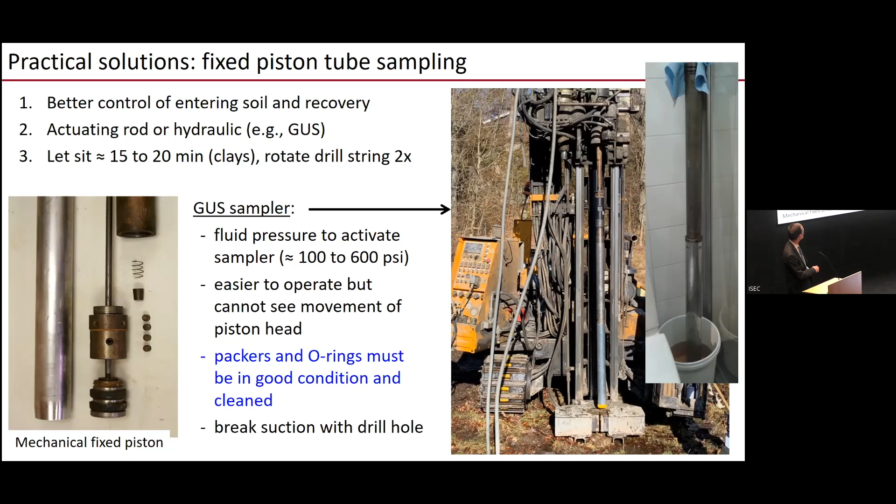It can be a challenge to get the piston head out of the sample. The Gus sampler has a little mechanism you can rotate, but I haven't had much luck with that. About 25 years ago, one of my grad students said, why don't we just drill a hole? And I was like, duh, yeah, of course. So we just drill a hole right in front of the piston head, and that's our suction relief to get the piston out of the sample.

With respect to in situ testing, it really is all about the piezo cone. Yet there are a lot of things in practice that are not done very well, and an especially important one is poor saturation. Fortunately, in the offshore world we don't have to worry about that—the water, especially in deeper water, back pressures the whole system, so it's not a problem.

But as you develop time and experience with your company or through publications, you can start to develop plots like this, again from Newbury, Mass. The green symbols are CRS test pre-consolidation stress values. This is our CPT profile, and I didn't calibrate the two—I just picked one-third, which is roughly the average relationship between sigma prime P and one-third q net.

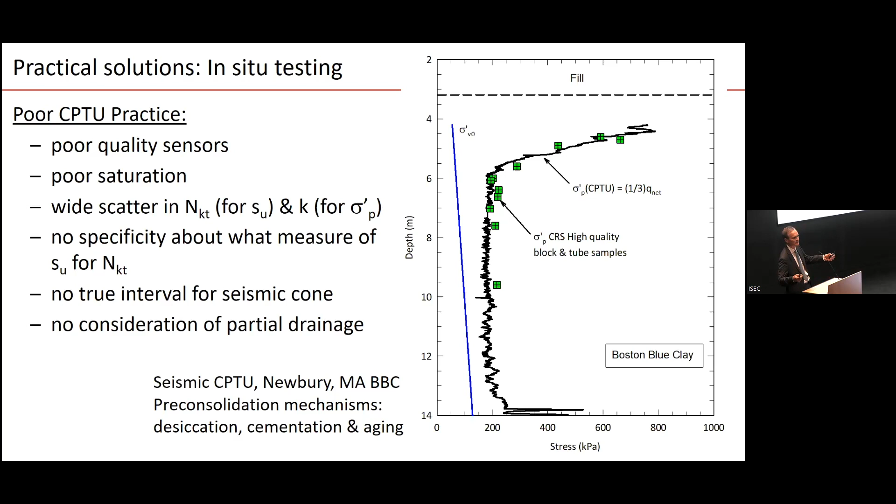Now I could tune this for the site, but I would be very confident in estimating what the pre-consolidation stress is with depth here. My point is, as you gain experience interlinking these two tools, you can start to be more efficient in reducing the lab side—which I don't know why I'm saying that because I'm primarily a lab person, but that is the reality of it.

With respect to transport and storage, this is generally not a problem unless people really do egregious things with your samples.

You put them in the back of your car. These are some fixed piston samples we collected. They are buckled in more safely than my kids were when they were children.

We do seal our samples, especially our block samples, with a 50-50 mix of wax and petroleum jelly. It's much more ductile than ordinary wax. It's waterproof, airproof. I can't tell you how many tubes have come into our lab covered in wax and the stuff just falls all off. But it's especially important for our block samples.

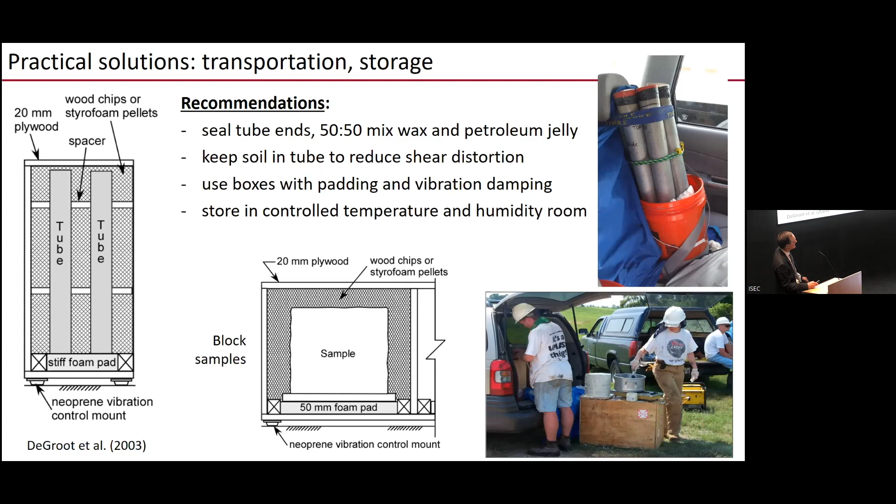As an example of transport, these are CRS curves for block samples of the Leda clay that we sampled up in Ottawa. Liquidity index of 3. We drove up there in a small van, collected the block samples, sealed them up, drove back. I had nightmares that they were just going to be all over the back of the van, having liquefied essentially. And there's the CRS curve we got at UMass Amherst. So transport is not that big a problem for clays.

Silts is a different story, but for clays, a couple of other examples.

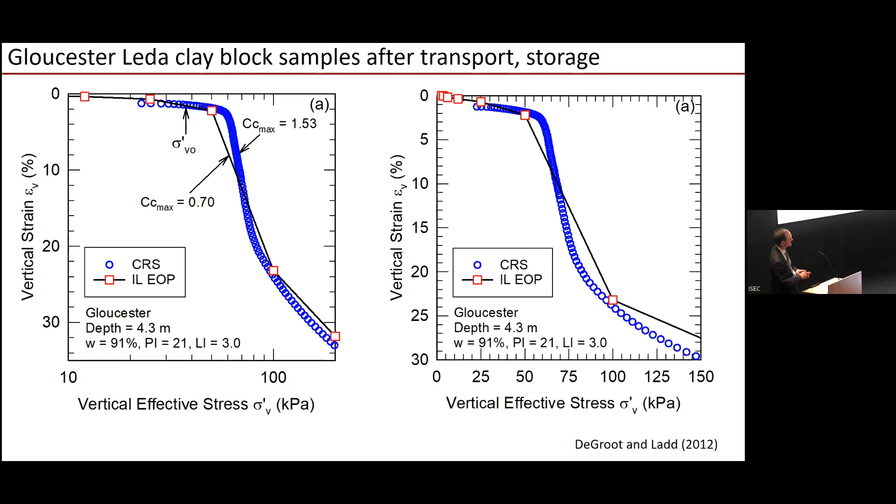These are block samples we collected in Norway, at the Onsøy site. The black curves, we opened the blocks at NGI, did CRS tests, sealed the rest of the block. We went to the airport, said a prayer, put it on a commercial airline, got them in Amherst the following summer, did the CRS test, and you can see the comparison. So this was very satisfying to see.

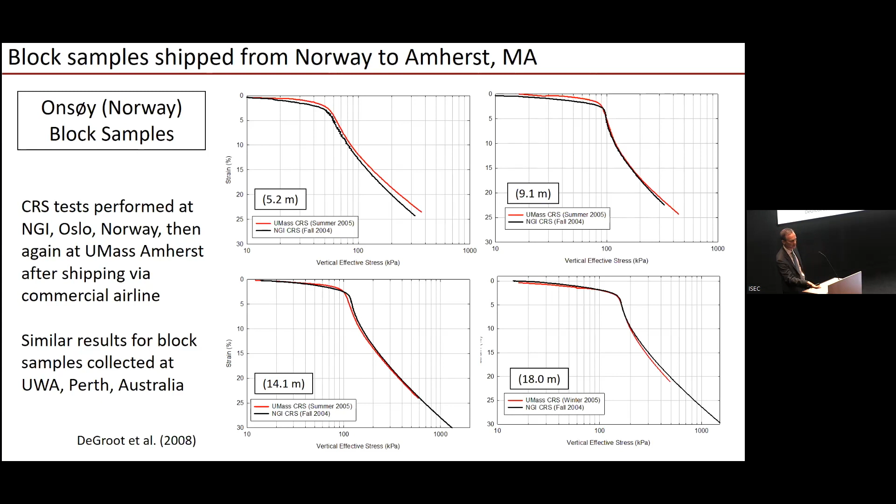So again, I think transport, unless something catastrophic happens - I know in some cases you can put min-max thermometers, you can put little accelerometers in there to see if they've popped, meaning something has dropped in terms of the transport process.

Storage. We do seal our important samples in this 50-50 mix. Arash Pirouzi, one of my former PhD students, we ran a CRS test on a sample that we've had since 2003. My wife complains I don't throw anything away. Well, this is the reason I don't throw anything away. So 14 years apart, and the blue curve versus the gray curve. So you can store samples.

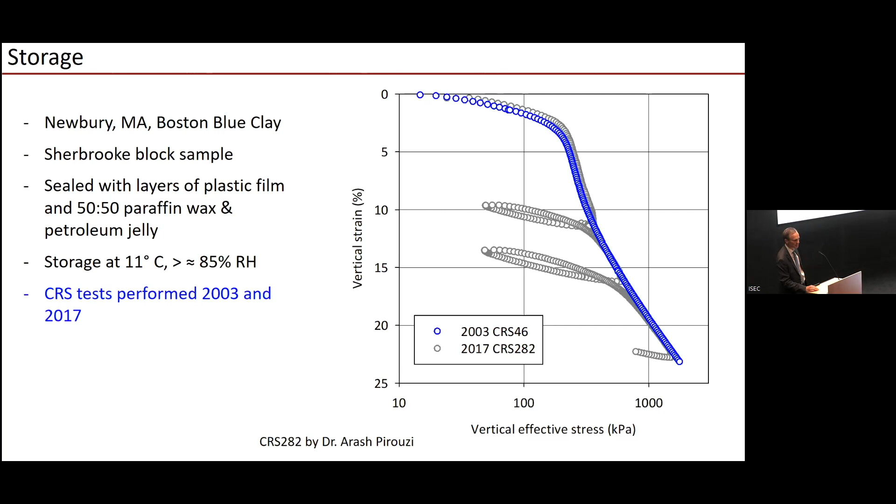We are currently working on Shelby tubes that have been stored for a long time. That's probably a little bit more dicey, but we're going to see what happens. But we will for sure be debonding those tubes.

When we process the tubes, we never use anything within about 1 to 1.5 diameters from the bottom. My standard procedure, if it's a full tube, I go up 4 inches, I cut, and I start from there. The bottom part, Atterberg limits, grain size, or whatever. And we debond using the wire, which is what Jack Germaine developed - one of his many excellent contributions to our profession - to debond the soil.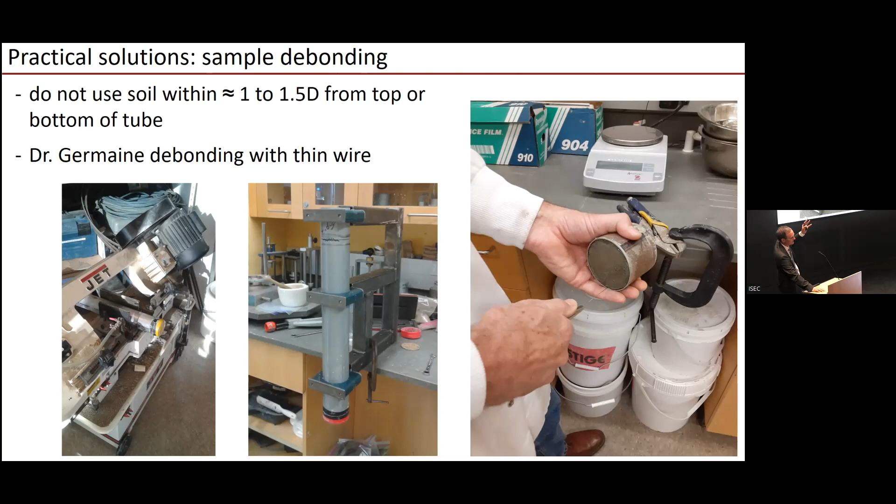So we cut with a saw for clay soils. If it has a very low PI and it's silty, can't use the saw, we use a pipe cutter. If it's almost non-plastic, there's nothing you can do - you won't get the sample out without liquefying it. And then you call the engineer and say, what do you want to do?

In terms of advanced laboratory testing, it's all about the CRS. It's all about stress history, which again, I think is what Professor Ladd was trying to stress. We always go first to the CRS. I've worked on many projects at NGI, and that's the first test we specify, even for projects where we don't even care about settlement - we want to know what the pre-consolidation stress is. That allows us to better plan the more expensive, more time-consuming advanced laboratory test program. It allows us to pick our stresses and allows us to make sense of the data in terms of normalized soil parameters.

You got to make a decision of recompression versus SHANSEP. I could talk for hours about our experiences with these two, but Tom is getting nervous - it's getting close to his bedtime, so I need to move on.

But there are some obvious pros and cons of both. What I will say is that in the SHANSEP method, Professor Ladd explicitly required you to assess the stress history - it is essential to the method. You should never produce recompression data without also explicitly evaluating the stress history and evaluating the data in the context of that stress history. The SHANSEP equation perfectly fits recompression data just as it does SHANSEP data.

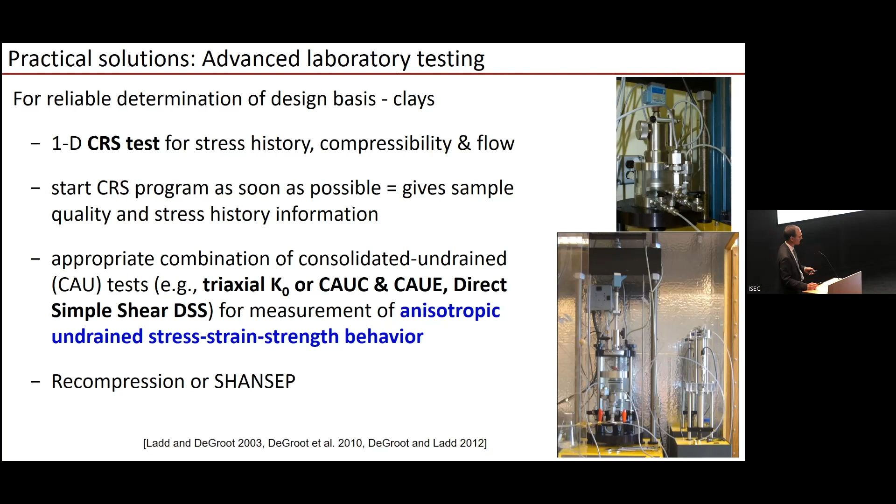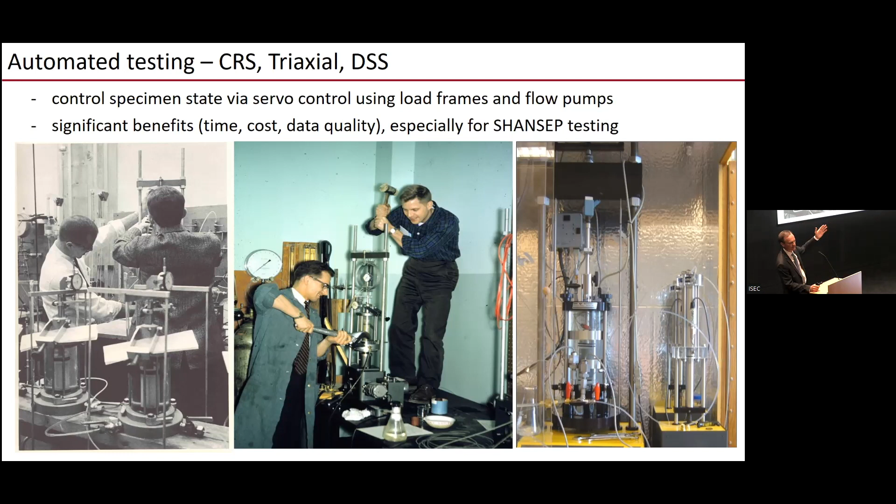Automated equipment really has improved the testing world tremendously, and it's a huge development. To get totally nerdy, which drives Tom crazy, I just love seeing data like this.

What's very valuable is to develop a body of experience on typical values that you can use, I'll call it the SHANSEP equation, but it's applicable to recompression tests and other measurements of soil behavior. So we offer some typical S values and M values that you can use, certainly appropriate for preliminary design, maybe low risk projects, but it should always be used to evaluate your data and build your database. Keep collecting more experience with these variables.

We have a whole collection of data of similar parameters for Boston Blue Clay, for example, from commercial projects.

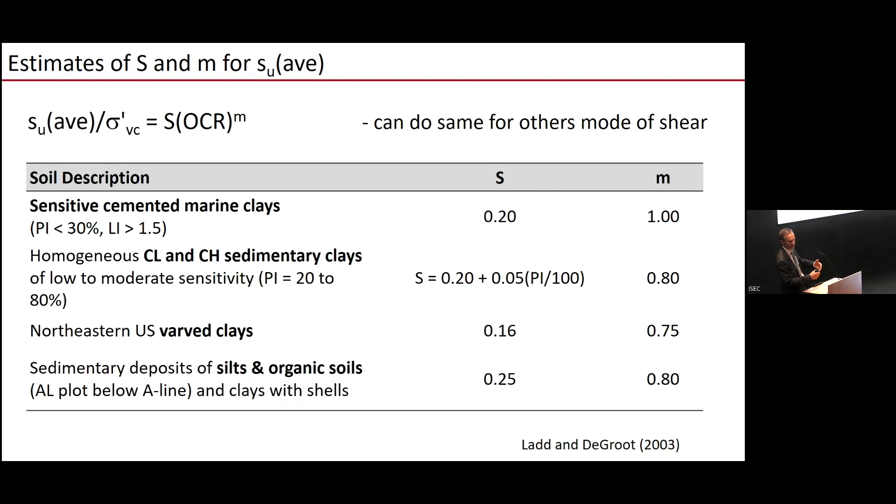And finally, I'm going to end on a couple of slides that give an example of poor practice. This is a project in the greater Boston area, a very thick deposit of Boston Blue Clay. And what did they do? They went out with SPT, which...

Sorry, but really a waste of time and money. Yeah, you got to weight of rod. Okay, that's no big surprise. It's perfect for CPT in this case.

I know CPT is a bit more expensive. You got to get ConeTec out of New Jersey, 10,000 to mobilize, maybe another 7,000 to 10,000 daily rate. But you got to think about the overall big picture of your project, it can be very cost effective.

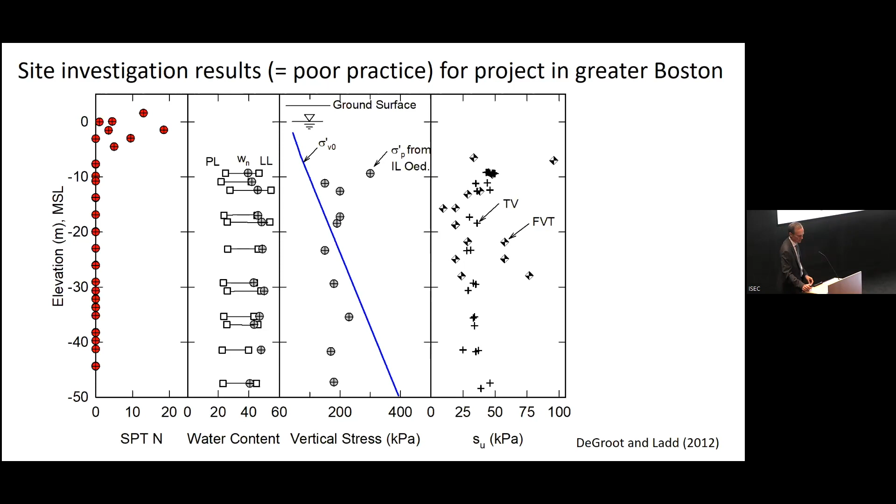You look at the pre-consolidation stress values from the oedometer test. Big red flag there, as you can see, obviously. Undrained shear strength profile data plotted like this doesn't really tell you anything, other than there's quite a bit of scatter. What you need to do, although in this case you really didn't need to,

Secondly, you look at the undrained shear strength, always reference data to profiles of like 0.1 and 0.3 sigma prime v naught. No soil will have an undrained shear strength less than 10% of the vertical effective stress, it's just not going to happen. Those data were clearly collected on disturbed tubes, and we got low values in this case for a soft clay.

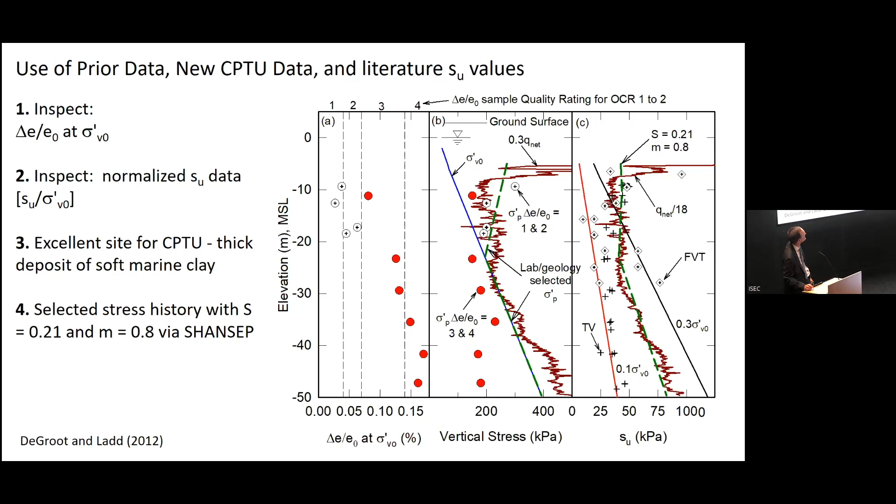It happens to be, we eventually went back to this site when we first saw this data. We did a piezo cone profile, and just using not even site-specific values of S and M, got what we would consider to be a pragmatic approach to evaluating the stress history, showing it's normally consolidated with depth. I know it's not, it's undergone some aging, but it's a pragmatic choice. And then developing an undrained shear strength profile that now falls in between the 0.1 and 0.3 bands, which is reasonable for a low OCR soil.

So some takeaway points. When it comes to characterizing soft clays, I've said it several times, the CPT is an excellent tool. Evaluation of stress history is essential, I think I've said it enough. It's what Professor Ladd always advocated, and I'm still strongly trying to advocate it today.

Number three, there are no mysteries here, we know what to do. Many people do it this way, but there are enough out there that is still of great concern. And of even greater concern, some people are just not yet aware of these issues. It's a question of education, which falls on us to start with, the professors at the universities that start educating our younger generations. And then the great value of using normalized soil parameters.

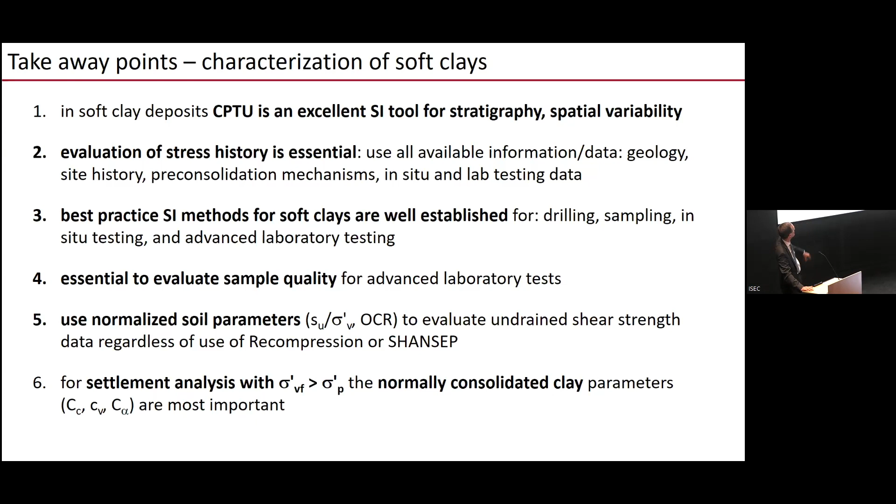I have one slide on a continuing challenge, which is what we call intermediate soils. The question is, will your soil behave clay-like or silt-like? It depends on the PI, depends on the silt fraction, and that's a tough decision. More sand-like, lean on in situ testing more. More clay-like, you can get samples and do the testing. The boundary has not been perfectly well defined.

If you have a soil that is fairly loose, I'm not sure if that's the right word for silts, but it's going to exhibit contractive behavior, and if you don't do a very good job sampling, you are pretty much guaranteed to measure dilated behavior in the lab, and that's a big problem.

Clearly on the pile driving side, you're going to go further up, to be conservative, a word I said not to use. Whereas on the stability side, you're going to come lower down. The good thing is, as I said before, if it's a drained problem, the friction angle is going to be fine. Disturbance doesn't seem to affect the friction angle.

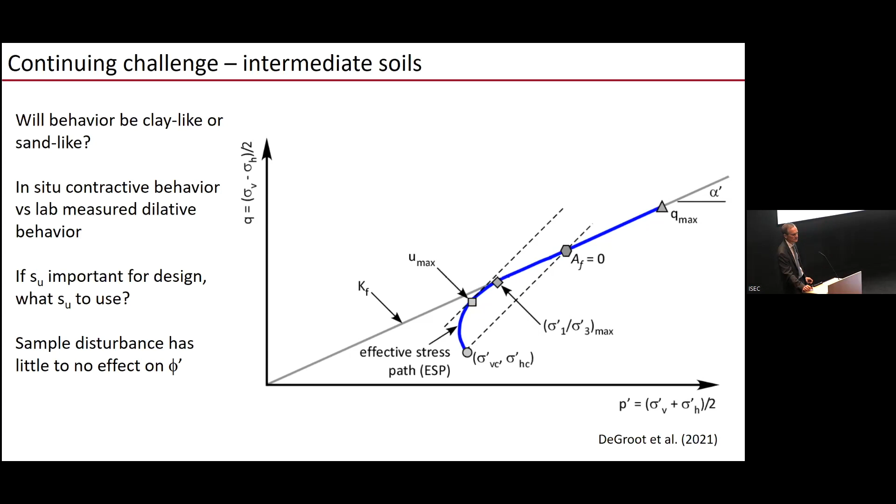Okay, that's the end of my talk. A lot of the tenets I described today, Jason DeJong and I wrote up in this paper. If you have a chance to read it, we would love to hear from you. We would like to hear of things we haven't thought of or been exposed to, things you may disagree with, or things you agree with. It would be great to hear from you.

So to wrap up, allow me a few minutes to say some words of thanks.

I've had the great privilege of working with many engineers over my career, and I'm extremely grateful for that. But it all starts with a person I fondly call the control tower, my partner in life, Virginia. We met in 1980 as civil engineering undergraduates in a class of 55 students, 3 females, and somehow this shy, insecure, nerdy engineer got one of them. Miracles happen.

When I was doing my doctorate at MIT, Carol Ladd, Professor Ladd's wife, took Virginia aside one day and said, Virginia, if you want Don to graduate, you need to get pregnant. I think Carol was speaking from deep experience. And somehow Virginia tricked me into getting pregnant. So our PhD child, Carolina, was born, and that did indeed force me to focus on graduating.

Then when I joined UMass Amherst and was on the tenure track, which was probably even more intense than finishing my PhD, Virginia tricked me again, and kicked me in the ass and said, here's another kid you need to worry about. And so number one son, who is sitting here somewhere, was born. To put it in geotechnical engineering terms, because of my training, I'm a soft clay person. Virginia is the bedrock of our family.

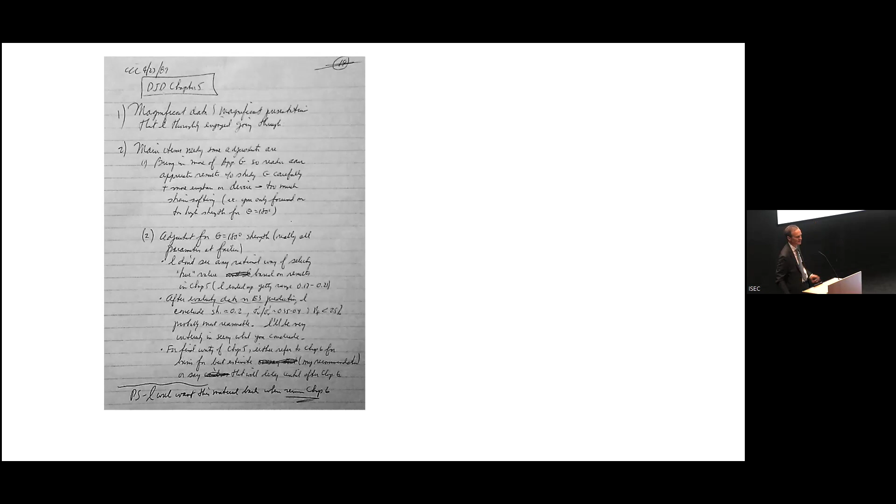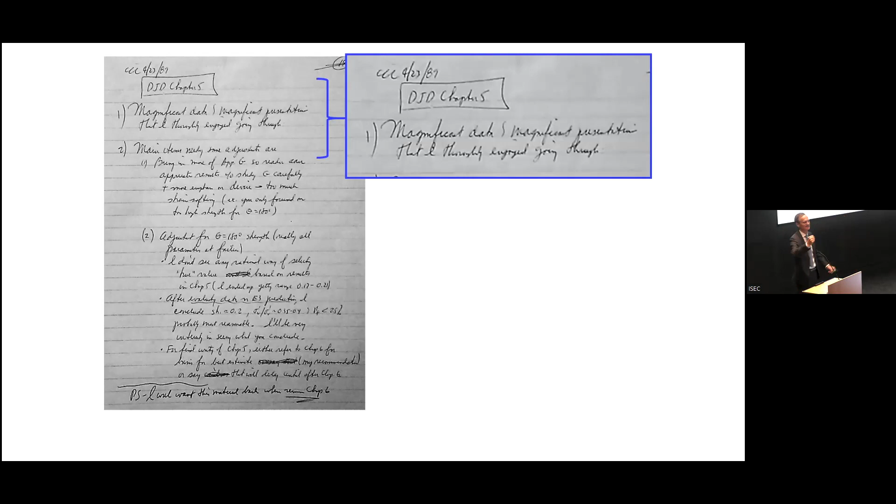Marika, your presentation was awesome because I wanted to create some PTSD for those of us here who have worked with Professor Ladd. I keep everything, fantastic, Marika. Now Virginia is not going to complain about me keeping everything. I still have all my handwritten notes from Professor Ladd for my dissertation. This page you can't read, this is chapter 5 of my thesis, presentation, interpretation, and results. When I got the package from Ladd, I ran back to my office, I was just anxious. And when I read the first sentence, it says, magnificent data and magnificent presentation that I thoroughly enjoyed going through. And I was like, yes. And then I thought, this feels pretty thick.

This feels a lot thicker than what I gave him. Like it feels twice as thick as what I gave him. And as Marika showed, his ability to focus and comment and improve your work is just amazing.

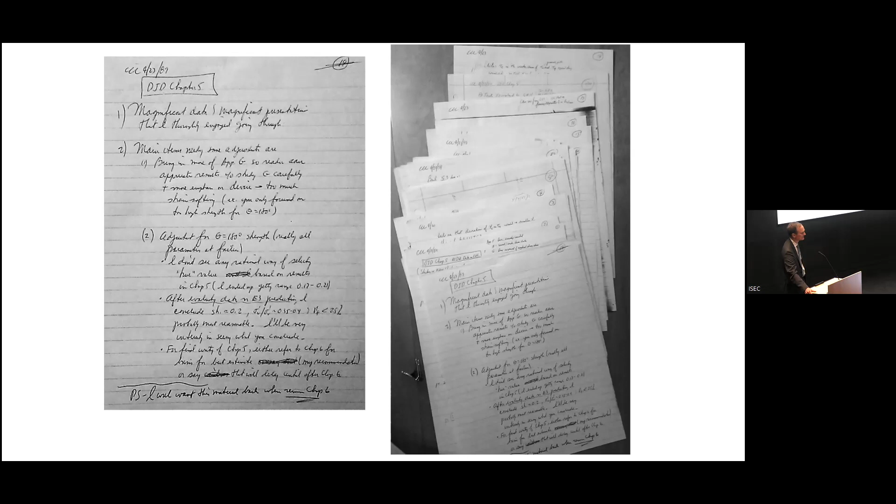Tom Sheahan, we have followed parallel careers. We met in the lab at MIT. Professor Ladd and Germaine were our advisors. We followed an academic career path. We've worked on many projects, wrote many papers. Tom is by far the best technical and fastest writer I've ever worked with. I have many times sent him my part of something to write and I get a reply that said, DeGroot, what is this brain fart you sent me? But he's really good at editing it.

We served as mutual psychiatrists, free of charge, in managing our careers. This was the day before cell phones and email, so it was on the phone. Tom, what's your worry? Or Don, what's your worry? And we would help each other out. Our wives said, you guys talk more than you talk to us. And in fact, one day the UMass admin person came to me with my phone bill and said, boy, you make a lot of calls and receive a lot of calls from the 617 area code.

But as some of you know, Tom has climbed the academic administrative ladder at Northeastern. In fact, Tom is in the C-suite now at Northeastern University. I can't get a hold of him, I have to talk to his people. I don't have people, it's me. And I can't get through to him, but I think he's grown a little bored of me talking about Atterberg limits and all of these things, and just doesn't have the time for me. But I couldn't ask for a better best friend. At BBF, there you go, better best friend. Thank you so much, Tom.

In terms of site characterization, I learned a lot when I went to UMass Amherst from Al Lutenegger. Al has an endless stream of ideas. He also has exceptional mechanical aptitude. I mean, how many professors build their own piezocone equipment and their own frame to use the piezocone equipment? And I'm very grateful to Al for that.

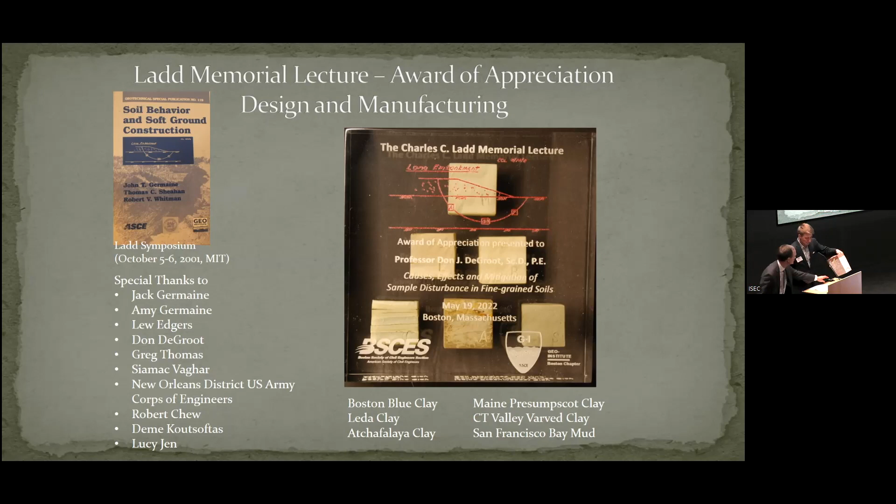First, as was previously mentioned, we have the second generation, or the new and improved Ladd mugs featuring the embankment sketch. I would like to thank everybody, both Professor Ladd's students and the donors who made this possible and coordinated the creation of these mugs. So we've got two of them in there for you. Great, thank you so much.

Absolutely, and secondly, oh yeah, this is a big one. I would like to present Don with the perpetual plaque for the Ladd Lecture to memorialize his participation in this amazing event and tradition. Wow, thank you so much, John.